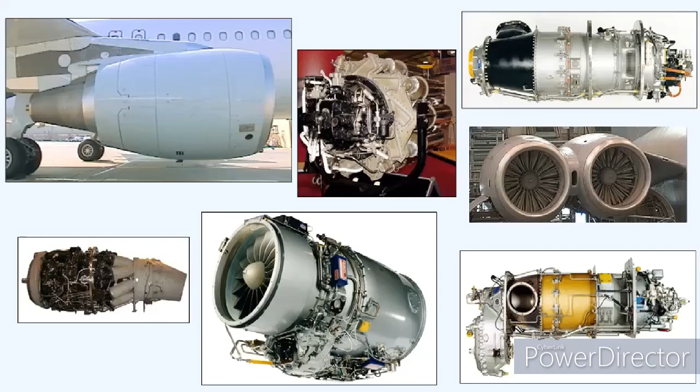All gas turbine engines use high-energy igniter units, or HEIUs, for engine starting. We'll investigate the intricacies of the high-energy igniter unit later.

All gas turbine engines have a dual ignition system fitted, meaning they have two high-energy igniter units. The high-energy igniter units each feed a separate igniter plug. High-energy ignition systems have an output of approximately 12 joules.

It may sometimes be necessary, to help prevent engine flameout, to have the ignition system selected in circumstances other than engine starting—for instance, during takeoff from contaminated runways, or flight through heavy precipitation. The use of the high-energy ignition system on these occasions will cause the igniter plug to erode so quickly that it will shorten its working life dramatically.

To minimize erosion of the igniter plugs, some aircraft engines are fitted with a combination ignition system, which includes a low-energy, 3 to 6 joules, continuous selection, as well as the high-energy, 6 to 12 joules, starting selection.

Continuous ignition, which energizes the low-energy mode of the igniters, is usually activated by selection of the appropriate switch on the engine start panel.

The starting ignition system is activated when the engine start sequence is initiated, either automatically or by the operation of the high-pressure fuel cock, start lever, or fuel and ignition switch.

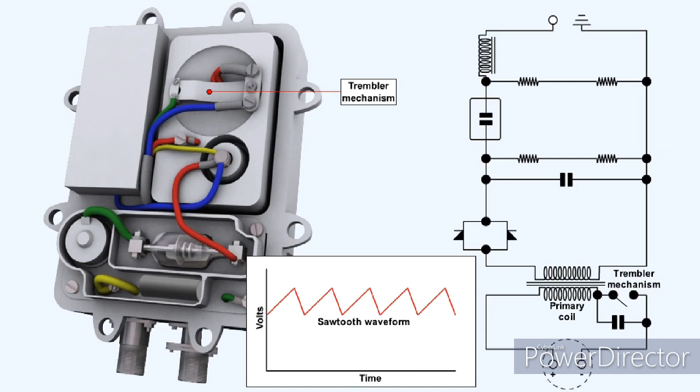Because we've generated alternating current, we can use a transformer to boost the voltage in the primary coil to 25,000 volts in its secondary coil.

The 25,000 volts alternating current is changed back to direct current in the rectifiers. The direct current commences charging the reservoir capacitor.

As the value of the charge in the reservoir capacitor builds up, it eventually reaches a level that causes a spark to jump the discharge gap.

The discharge gap exists within an evacuated tube. The fact that the tube is evacuated means that changing conditions of humidity and altitude will have no effect on the voltage required to jump the gap within the tube.

Consequently, the power of the spark at the igniter plug will be constant, regardless of ambient conditions.

The electrical energy which has crossed the discharge gap has then to flow through the choke. The choke acts as an inductance and slows down the current flow. Slowing the rate of current flow makes the duration of the spark longer.

The energy then passes to the igniter in the combustion chamber.

If the unit has to be removed from the engine for servicing, any charge which may remain in the capacitor, even after the electrical power to the unit has been disconnected, could be lethal to anyone touching the casing of the high-energy igniter unit.

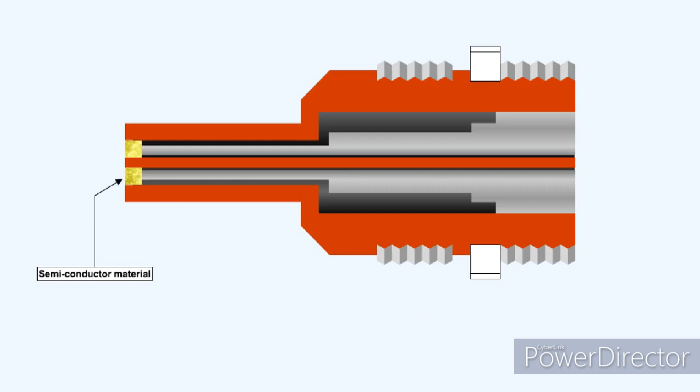A more modern version of the igniter plug is the surface discharge igniter plug shown here. The end of the insulator is formed from a semiconductor material, which allows an electrical leakage to occur between the hot electrode and the body of the igniter. This leakage ionizes the surface of the semiconductor material, providing a relatively low resistance path for the energy stored in the capacitor.

The discharge takes the form of a high-intensity flashover from the hot electrode to the body of the igniter, which only requires approximately 2,000 volts. This concludes the lesson on ignition systems.

There are three basic requirements which must be satisfied before we can start a gas turbine engine. The compressor turbine assembly must be rotated to get air into the combustion chambers, fuel must be provided in the combustion chambers, and ignition must also be provided in the combustion chambers to start the air-fuel mixture burning.

Supplementary to these basic prerequisites for engine starting are two other requirements which satisfy servicing essentials: the necessity to motor over the engine with no igniters operating, sometimes called a blowout or motoring over cycle. This usually only occurs after a failure to start, sometimes called a wet start. The other requirement is for the igniters to be operated independent of the start cycle.

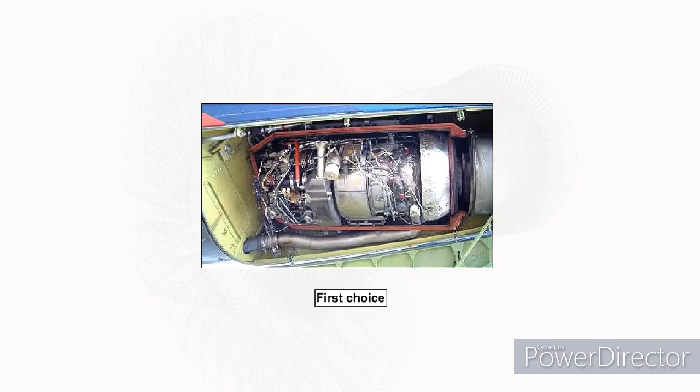The sources of air available for engine start, in order of preference, are: the Aircraft Auxiliary Power Unit, or APU. Use of an APU does not cost the airline anything, so it definitely will be the favourite method of supplying air for engine starting.

The Ground Start Unit. If a ground start unit is required, perhaps because of APU unserviceability, the airline will have to pay for its use. This is understandably not too popular with the airlines.

A crossbleed start, where air from an already started engine is used, doesn't cost the airline anything, but it does require that the engine supplying the air has power applied to it. In the crowded environment of the ramp, applying power to an engine carries obvious risks, and some airport authorities are reluctant to give permission to the pilot to carry out this type of operation.

Air from one of these sources is fed through an electrically controlled air start valve to the starter motor's air inlet, where it's used to turn the turbine rotor. The air is subsequently exhausted to atmosphere.

The turbine rotor turns the reduction gear, which rotates the engine high-pressure compressor shaft through a ratchet clutch arrangement, designed to prevent the starter motor being driven by the engine after engine start. The danger, should this happen, is that the starter motor will rotate at a speed sufficient to cause it to break up due to centrifugal force.

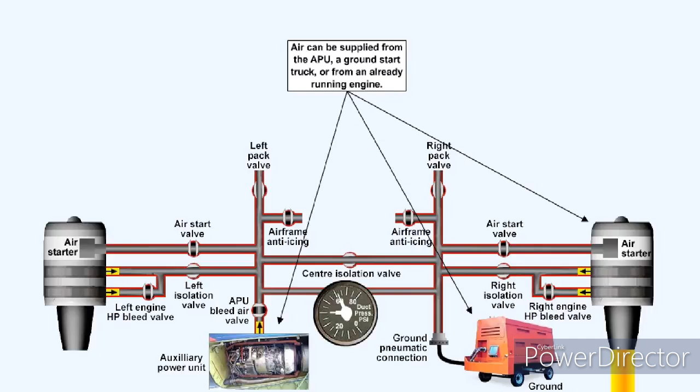On this particular start, we'll utilize the aircraft's APU to supply air. The aircraft's normal bleed air system ducting is utilized to pass the air to the starter motor. Non-return valves at the low-pressure and high-pressure engine bleed positions prevent air leaking back into the engine compressor during engine start.

The engine instruments which require the most attention during the engine start sequence are the exhaust gas temperature gauge, EGT, and the high-pressure compressor rotational speed gauge, N2. These two parameters must be monitored closely to ascertain whether or not the start cycle is proceeding safely.

Other instruments that should be monitored during the start are fuel flow, engine oil pressure, low-pressure compressor rotational speed, otherwise known as N1, system duct pressure, and the start valve open light. Normally the number 2 engine will be started first.

For the first start of the day, right ignition is selected, and the number 2 engine start switch is selected to ground, which is the ground start position. The selection of ground opens the APU bleed air valve and the number 2 engine air start valve.

To indicate that air is getting to the starter motor, the start valve open light above the engine instruments illuminates. The starter motor turns the high-pressure compressor, which we can note by checking the N2 reading. This is an appropriate time to start timing the starter motor duty cycle.

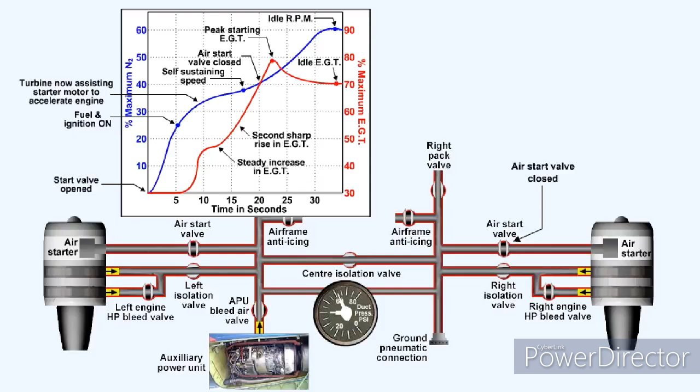Ground idle RPM is approximately 60% N2 and 25% N1.

To achieve a blowout cycle, the starter motor is activated without the selection of either fuel or the ignition system. When it's used for a blowout cycle, a typical air turbine starter motor has a duty cycle of 2 minutes on, followed by a 5-minute cooling down period. Always check the manual to determine the exact duty cycle of the starter motor fitted to your engine.

In the event of an engine flaming out while the aircraft is airborne, it may only be necessary to initiate the fuel flow and activate the ignition system without operating the starter motor to achieve a relight. The starter motor should not be required to rotate the engine in these circumstances because the engine should already be windmilling.

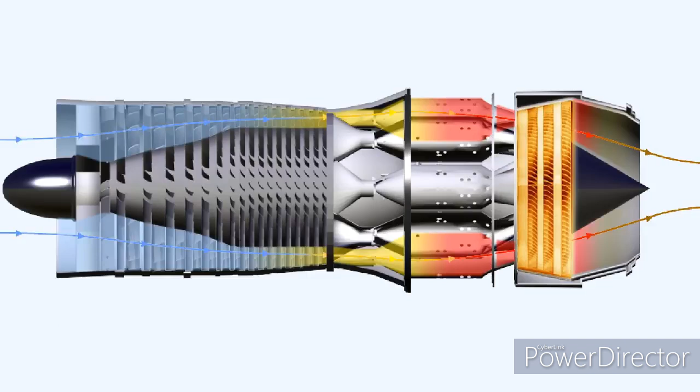The reasons for a hot start lie almost entirely in having either too much fuel or not enough air to cool the gases through the turbine. A surplus of fuel can be caused by a variety of reasons, such as the throttles either not being set to idle during the pre-flight check or being knocked away from the idle position after the pre-flight check. A shortage of sufficient cooling air can be caused by the engine not rotating fast enough, maybe because the duct pressure is too low to drive the starter motor at the required speed.

Slow engine rotation could also be caused because ice accretion within the compressor annulus has caused a partial seizure of the compressor.

A hot start can also be caused by the aircraft being positioned, perhaps for its second start of the day, with the wind going up the jet pipe, as opposed to the ideal situation when the wind would be going into the intake. The tailwind will make the job of the starter motor more difficult, and it will have more trouble pushing sufficient air through the engine quickly enough to keep the core temperature within limits. The residual heat that remains in the engine after shutdown will exacerbate the problem.

The failure of the gas turbine engine to start, more commonly known as the wet start, is indicated by its EGT not rising and its RPM stabilizing at the maximum that the starter motor can achieve. If the engine fails to light up within the required time limit, which is usually about 20 seconds, then the ignition supply should be deselected and the fuel supply shut off.

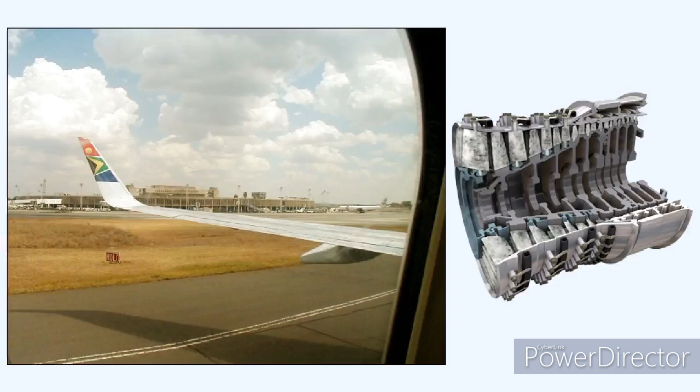For instance, if you're at a high-altitude airfield and you're attempting to start an engine which has a contaminated compressor, that compressor will choose this time to make its inefficiency felt.

Insufficient motive power applied to the starter motor will prevent it from rotating the compressor fast enough to push the required amount of air through the engine. This means the gases generated in the combustion chambers will not have sufficient power to assist the starter motor in accelerating the engine beyond self-sustaining speed. Thus, once the starter motor cycle has finished, the engine RPM remains stable below the figure that enables it to accelerate up to ground idle speed.

Engine rundown time, or spool down time, is the time taken for the engine to stop after the high-pressure fuel supply is shut off. When engines are shut down after flight, a mental note should be taken of the rundown time of each engine, and a comparison made between those times. Any engine with a rundown time appreciably less than the others should be noted. A short rundown time may be indicative of an impending malfunction.

The entire system which stores, carries and controls the fuel supply for the engines can be divided into two sections: the airframe fuel system and the engine fuel system.

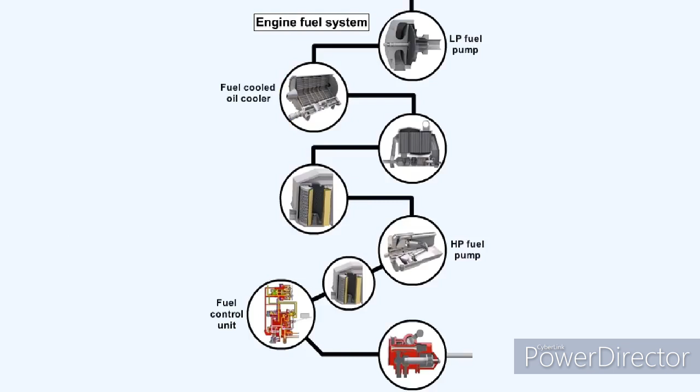A fuel-cooled oil cooler is fitted in the majority of gas turbine engine installations. The oil cooler serves the double purpose of cooling the oil and also heating the fuel. By raising the temperature of the fuel, the oil cooler eliminates the formation of ice crystals, which may block components downstream in the fuel system.

The oil feed line to the fuel-cooled oil cooler incorporates a pressure-maintaining valve. This valve keeps the oil pressure in the cooler higher than the fuel pressure. If the oil cooler does develop an internal leak, the fact that the oil pressure is higher than the fuel pressure will ensure that the oil leaks into the fuel system, rather than the fuel leaking into the oil system, which could be very dangerous.

The fuel heater assists in the warming of the fuel, and thus the elimination of ice crystals. The fuel heater, working in conjunction with the fuel-cooled oil cooler, uses compressed bleed air to warm the fuel to automatically maintain a predetermined fuel temperature. The automatic temperature control is achieved by the action of a Vernatherm thermal actuator. The thermal actuator incorporates a material sensitive to temperature change, used to open or close a valve which regulates the entry of hot air into the fuel heater from the engine compressor.

The low-pressure fuel filter is the first line of defense, protecting the delicate control components within the high-pressure fuel pump and the fuel control unit from the effects of dirt or contamination. The low-pressure filter is usually a replaceable paper filter element, capable of filtering out particles larger than 50 to 100 microns.

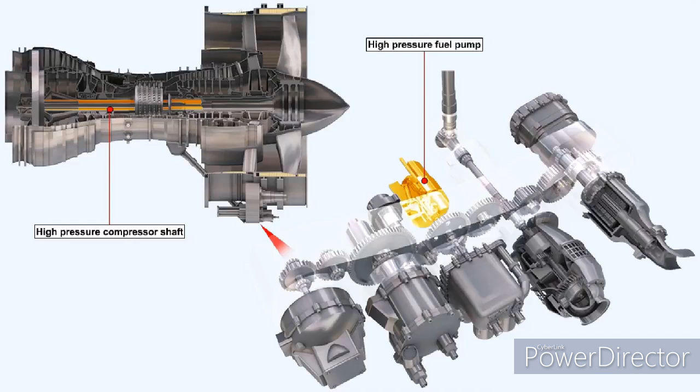The high-pressure fuel pump, illustrated, is representative of one type of pump employed. It's a plunger-type pump. It can be used as a single unit, if the volume of fuel required is not too great, but in larger engines 2 units can be driven together to supply a greater fuel flow.

Several plungers are fitted on a rotor assembly. The plungers are rotated against a stationary cam plate, which causes them to reciprocate within the bores that contain them on the rotor assembly.

The distance that the plungers move during this reciprocating action is dictated by the angle of inclination of the cam plate. Here we see the cam plate angled so that the plungers stay in the same position in their bores as the rotor drives them round.

Now the cam plate angle is such that the springs force the plungers to their maximum stroke when they are at the top of the cam plate, sucking fuel into the bores. And the cam plate forces the plungers to their minimum stroke when they are at the bottom of the cam plate, forcing fuel under pressure to the outlet of the pump.

The angle of inclination of the cam plate is controlled by a servo piston, which itself is controlled from the fuel control unit.

Most fuel systems incorporate a fuel filter into the output of the high-pressure fuel pump to prevent very fine particles entering the extremely small passageways inside the fuel control unit. The fuel filter is composed of a number of wire mesh screen discs.

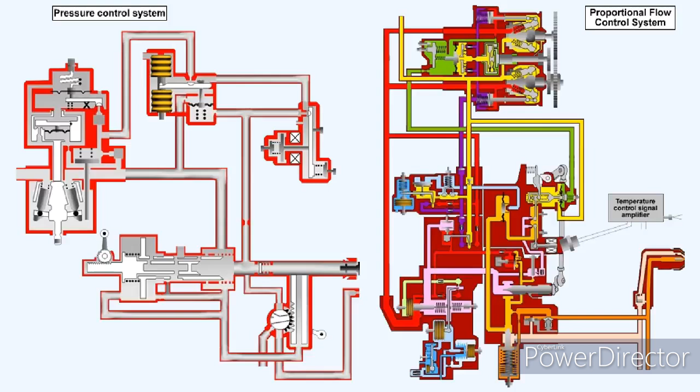Various devices within the fuel control unit are used to adjust the fuel flow to cater for variations in air intake pressure, engine acceleration control, exhaust gas temperature, RPM limiting, and compressor delivery pressure.

Variations in air intake, or P1 pressure, require that the fuel flow to the burners is adjusted so that a fixed RPM is maintained for a selected throttle position at all altitudes and airspeeds. This is achieved by the expansion or contraction of a capsule influenced by P1 pressure, which in turn modifies the fuel flow to suit the new conditions. This capsule, known as the barometric pressure capsule, is incorporated in an altitude sensing unit within the fuel control unit.

It's necessary to increase the fuel flow to the engine to make it accelerate. However, too rapid an increase of fuel flow into the engine can cause compressor stall and surge. To regulate the fuel flow under conditions of engine acceleration, an acceleration control unit is fitted within the fuel control unit. The acceleration control unit receives information regarding engine intake pressure, P1, and compressor delivery pressure, P3 for a two-spool engine, and uses this information to adjust a fuel metering plunger. The fuel metering plunger effectively acts as a second throttle valve in series with the main throttle, and it regulates the fuel flow to achieve the fastest engine acceleration without causing stall or surge.

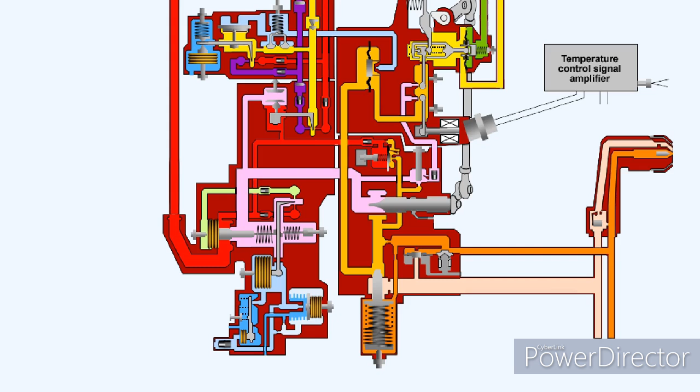If excessive centrifugal force is to be prevented from destroying the compressor spools, their maximum rotational speeds must be limited. There are basically two methods of achieving this compressor rotational speed limitation. The first method of controlling the rotational speed of a compressor, usually the low-pressure compressor, depends on an electrical signal proportional to the speed of the compressor shaft. A tachogenerator or electronic speed sensor, which is driven by the appropriate shaft, sends signals to an amplifier. If the output of the tachogenerator approaches a predetermined maximum level, the fuel flow will be adjusted to prevent the maximum RPM being exceeded. The second method of controlling the rotational speed of a compressor is normally used to control the speed of rotation of the high-pressure compressor shaft.

This high-pressure compressor shaft drives the accessory gearbox, which in turn drives, among other things, the high-pressure fuel pumps. Fitted within the high-pressure fuel pump is a hydromechanical governor. The hydromechanical governor uses hydraulic pressure as its controlling parameter. The hydraulic pressure, which is generated inside the pump by the rotation of the moving parts, is proportional to engine speed. As engine speed, and thus hydraulic pressure, builds, it acts on a diaphragm. Movement of the diaphragm opens valves which bleed off some of the servo piston pressure, which reduces the high-pressure fuel pump cam plate angle. This reduces the high-pressure fuel pump output and attenuates the fuel flow to the burners.

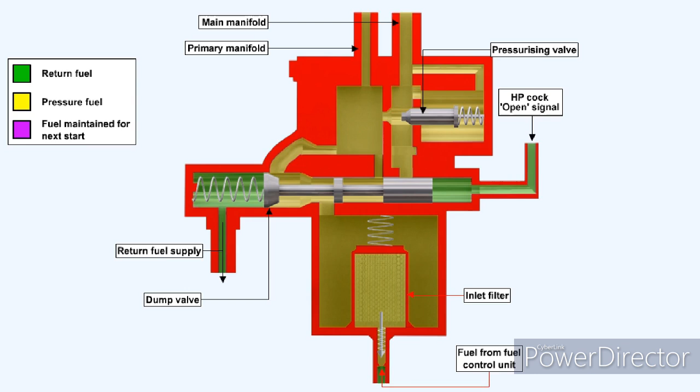Many modern gas turbine engine installations utilize electronic engine control to enable better fuel economy, better reliability, and prolonged engine life. Two types of electronic engine control are currently in use: the supervisory engine control system, and the full authority digital engine control system.

The supervisory engine control system uses a computer which receives inputs of various engine operating parameters and controls a standard hydromechanical fuel control unit. The fuel control unit responds to the electronic engine control commands and performs the functions necessary for engine operation and protection.

The computer will monitor EPR, throttle lever angle, Mach number, engine intake pressure, and temperature, and will maintain a constant thrust regardless of changes in air pressure, temperature, or flight environment. Any fault with the electronic engine control will cause the system to revert to manual control.

The Full Authority Digital Engine Control System, commonly called by its initial letters FADEC, receives all the necessary data for engine operation and takes over virtually all of the steady-state and transient control functions, which includes compressor airflow control.

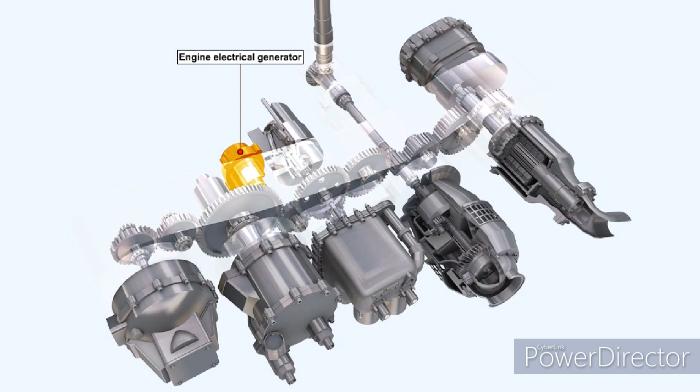The FADEC system can be powered from the aircraft electrical system, but in most modern aircraft the system is driven by a separate generator fitted to the accessory gearbox of the related engine. This concludes the lesson on engine fuel systems.

The adoption of the gas turbine engine as the power unit of choice for military and subsequently civil aircraft became more and more the norm after the end of World War II.

During World War II, the war effort required every drop of gasoline, and partly because it was thought that gas turbine engines were relatively insensitive to the properties of the fuel they used, but mainly because it was more available than gasoline, kerosene was chosen to power them.

After the war, the United States Air Force started using a fuel in gas turbine engines which spanned the gasoline and kerosene boiling ranges. This fuel was called a wide-cut fuel, a name which stemmed from the position in the distillation process from where the fuel could be taken.

It was assumed that during wartime conditions, wide-cut fuel would be available in greater volume than either gasoline or kerosene alone.

However, when compared to a kerosene-type fuel, the higher volatility of the wide-cut fuel gives it some operational disadvantages. At high altitudes, wide-cut fuel evaporates much more quickly. There is also a greater risk of fire and explosion when wide-cut fuel is being handled on the ground.

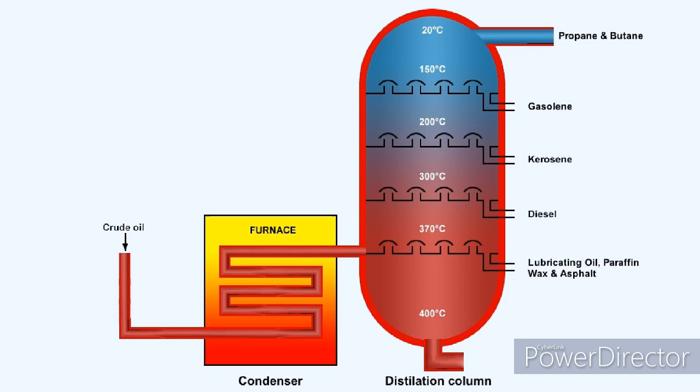Finally, the residual, which can be further refined by a catalytic cracking process into lubricating oil, paraffin wax and asphalt, is drawn off at the bottom of the column.

The quality of the light products generated by distillation alone is often poor, so the refinery must use conversion processes, like the catalytic cracking just mentioned, and upgrading to bring the fuel to a standard which is suitable for its task.

Upgrading processes are used to improve the standard of the fuel by using chemical reactions to remove any compounds which may give it undesirable qualities.

One such upgrading process is called sweetening. Sweetening converts sulfur mercaptans in the fuel into disulfides. While sulfur mercaptans are corrosive and have a strong offensive odour, the disulfides are not corrosive, and their smell is less strong.

The two leading organisations which set and maintain specifications for civil aviation turbine fuels are, in the United Kingdom, the Ministry of Defence, or the MOD, and in the United States, the American Society for Testing and Materials, ASTM. In the Commonwealth of Independent States and parts of Eastern Europe, gas turbine engine fuels are covered by GOST specification.

The specification of an ideal fuel for a gas turbine engine would include the following requirements. The fuel must be able to flow freely from the aircraft's fuel tanks to the engines.

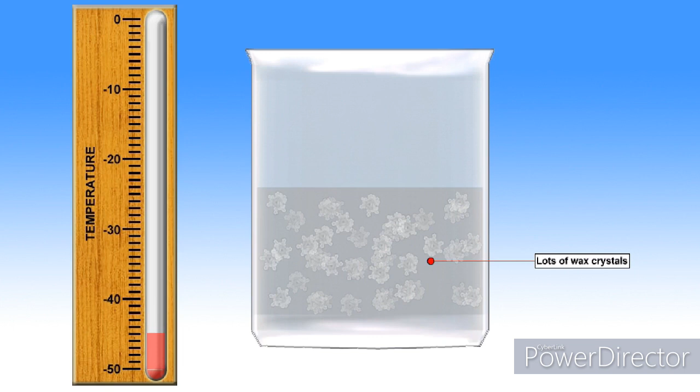Thus the fuel changes gradually from a homogeneous liquid into a liquid which contains a few wax crystals, then to a slushy liquid composed of fuel and wax crystals, and finally to an almost solid block of wax crystals.

Small carbonaceous particles are formed early in the combustion process within a gas turbine engine. In ideal conditions within the engine, the particles would be completely consumed, but conditions seldom remain ideal, and if they impinge upon the nozzle guide vanes and rotor blades of the turbine, the particles will erode them.

Fuels differ in density and therefore in energy content per unit weight or unit volume. Less dense fuels have a higher energy content per unit weight, as for instance aviation gasoline, which has 18,800 British thermal units per pound. But they have a lower energy content per unit volume, in this case 112,500 British thermal units per gallon. The relationships are reversed for denser fuels like kerosene, which has only 18,610 British thermal units per pound, but 125,800 British thermal units per gallon.

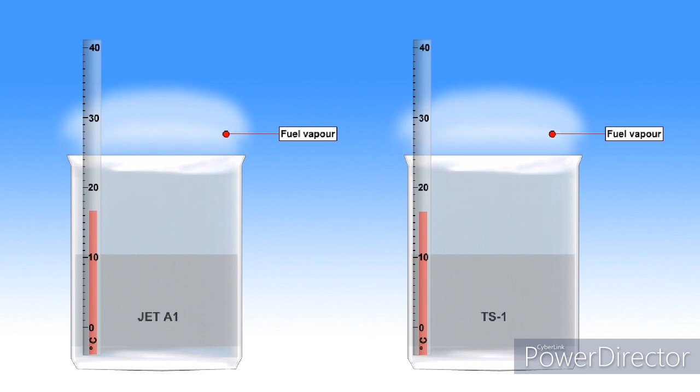The flash point of a liquid is the lowest temperature at which the vapours above a liquid will ignite when they are exposed to an ignition source. The higher the flash point of a fuel, the lower the fire hazard it presents.

We have just seen that to burn, the fuel must turn from a liquid state into a vapour. Volatility is a fuel's ability to vaporize, so it's important that the fuel is reasonably volatile. However, if the fuel is too volatile, it will evaporate quickly when the aircraft is at altitude, and it could cause vapour locks to occur at the inlet to the fuel pumps.

Lubricity is the ability to reduce friction between solid surfaces which are in relative motion. Gas turbine engine fuels must have a degree of lubricity, because the fuel is used as a lubricant in the pumps. These requirements can be met, and the various methods used to achieve them are discussed later. However, in practice, the cost of satisfying all of them is prohibitive, and therefore compromises have to be made.

We've already stated that the gas turbine engines of commercial aircraft would normally use kerosene fuels. The types of fuel which can be used in gas turbine engines are listed here, together with some of their characteristic properties.

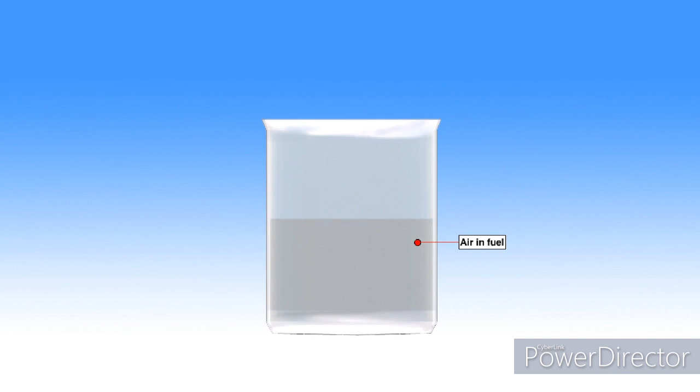If a fuel sample is placed in a clean, transparent, dry glass container and swirled vigorously to generate a vortex in the sample, and the sample appears cloudy or hazy, this could be caused by a number of factors. If the cloudiness appears to rise quite rapidly towards the top of the sample, then air is present. If the cloud falls quite slowly towards the bottom of the sample, then water is present in the fuel. Having said that, a cloudy appearance usually indicates the presence of water.

A certain amount of water is present in all fuel. The water, which is normally dissolved within the fuel, gives rise to the following fuel system problems. As an aircraft climbs to altitude, the fuel is cooled, and the amount of dissolved water that it can hold is reduced. Water droplets form, and as the temperature is further reduced, the droplets turn to ice crystals, which can block fuel system components.

Microbiological fungi called Cladosporium resinae and Pseudomonas aeruginosa are present in all turbine fuels. These fungi grow rapidly in the presence of water to form long green filaments, which join together to form dark, gel-like mats. The filaments and mats can block fuel system components. The waste products of the fungus are corrosive, especially to fuel tank sealing substances.

The inclusion of a fuel system icing inhibitor, or FSII, in the fuel will help to overcome these problems. The inhibitor presently in use in all countries except Russia is diethylene glycol monomethyl ether. Not only does it inhibit the ability of the water in the fuel to freeze, it also acts as a biocide, which retards the growth of microorganisms in the fuel.

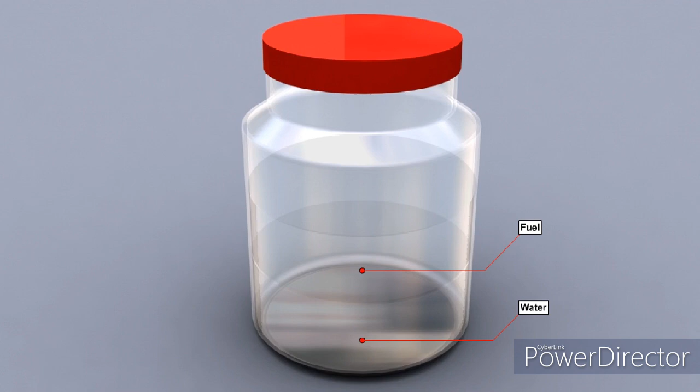If the fuel can be allowed to settle after replenishment, then the water droplets, being heavier than the fuel, will fall to the bottom of the tank and can then be drained off through the water drain valve, which is situated in the lowest part of the fuel tank.

Heating the fuel before it's passed into the more sensitive components of the system will assist in preventing ice formation. In gas turbine engine fuel systems, the fuel is passed through a heat exchanger which is powered by compressor delivery air to melt any ice crystals which may have formed while the fuel was exposed to the very low temperatures experienced at high altitudes.

Some systems also utilize a fuel-cooled oil cooler. This has an added attraction in that we appear, just for once, to get something for nothing. After all, the oil has to be cooled, and the fuel benefits by being warmed, so 2 jobs for the price of 1.

Once the fuel is in the aircraft fuel tanks, the main source of water contamination is the atmosphere that remains within the tank. If the tanks are topped up to full, then the atmosphere is excluded, together with the moisture it contains, thus minimizing the likelihood that the fuel will be contaminated.

Caution is required here. Filling up the tanks may prove an embarrassment the next day if the ambient temperature rises. The volume of the fuel in the tank will increase, and there is the danger that it may spill out of the vent system.

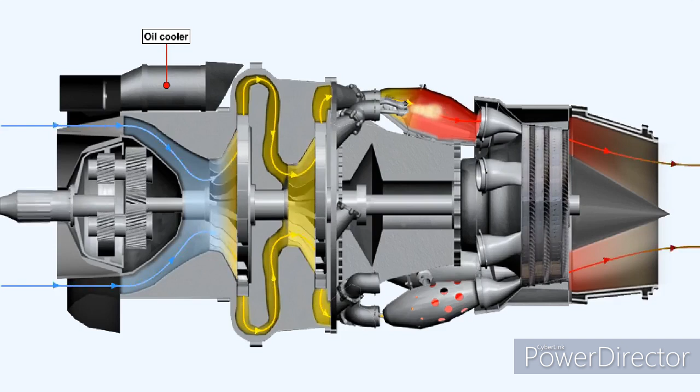A further task of the lubricating oil is that of being a hydraulic fluid. For instance, in some turboprop engines, the control of the pitch of the propeller blades is achieved by using the engine lubricating oil to operate the pitch change mechanism.

Most gas turbine engines use a self-contained recirculatory lubrication system in which the oil is distributed around the engine and returned to the oil tank by pumps. There are two basic recirculatory systems which we'll investigate here: the pressure relief valve system and the full flow system.

The pressure relief valve, which gives its name to this type of lubricating system, is situated in parallel with the oil pressure pump. It limits the pump outlet pressure by diverting any excess volume back to the inlet of the pump, thus controlling the flow of oil to the bearing chambers.

The engine oil pressure is restricted to a value which the engine designer considers correct for all conditions that the engine might encounter.

The pressure relief valve will begin to relieve pressure at the value which is generated by the oil pressure pump at engine idling speed. As a consequence, the pressure relief valve theoretically maintains a constant pressure over the whole of the engine's speed and oil temperature ranges.

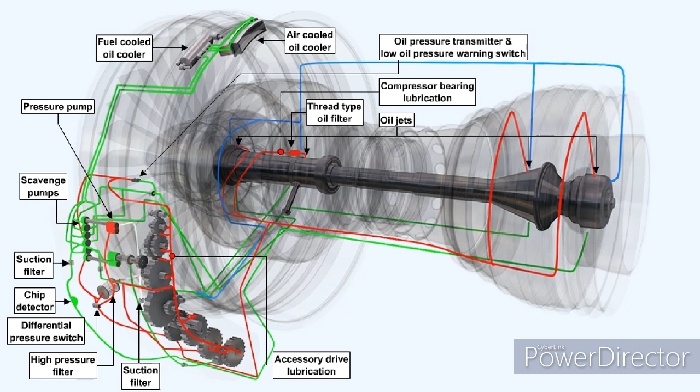The scavenge pumps pass the oil to the oil cooling system. This engine utilizes two types of oil cooler, a fuel-cooled oil cooler and an air-cooled oil cooler. Normally the fuel-cooled oil cooler is sufficient to cool the oil on its own, but in the event that it proves inadequate, a valve opens automatically and brings the air-cooled oil cooler into operation as well.

We mentioned earlier that air pressure escaping from seals cannot be allowed to build up within the engine. In this engine, air pressure within the engine is vented through the hollow shaft of the drive between the intermediate gearbox and the external gearbox, leaving the external gearbox via the centrifugal breather.

The oil tank is normally a separate unit mounted on the side of the engine, although it can be part of the engine intake, or even an integral part of the accessory drive unit.

Whatever form the oil tank takes, it must incorporate provision for filling, either by gravity and/or more normally from a pressure source. There must also be some method of determining the contents of the tank, either by a sight glass or by a dipstick—sometimes both methods are used. A de-aerator tray removes air bubbles from the oil as it flows back into the tank.

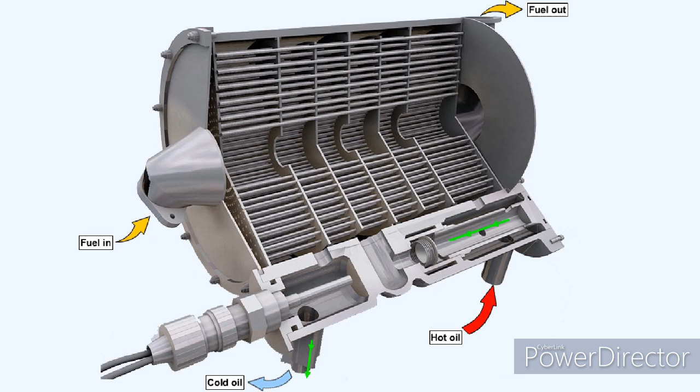In the event that damage to the oil cooler matrix does occur, fuel is prevented from entering the oil system by the oil pressure being kept at a value higher than the fuel pressure. This is done by a pressure-maintaining valve located in the oil feed line to the cooler. Thus the oil will leak into the fuel system rather than the other way round.

Chip detectors, which are permanent magnet plugs, are situated in some of the scavenge lines to collect ferrous material from the oil as it returns to the scavenge pumps. The chip detector is retained in the pipeline by a bayonet fitting within a self-sealing housing. The fact that the valve housing is self-sealing means the detector can be removed without any loss of oil.

We've already stated that to prevent excessive air pressure within the accessory drive unit and the bearing chambers, the interior of the engine must be vented to atmosphere. Airborne oil droplets in the air within the engine form an oil mist which, if allowed to escape unhindered, would rapidly deplete the engine oil contents. The oil mist is vented to the accessory drive unit, where it must pass through the centrifugal breather before reaching the atmosphere.

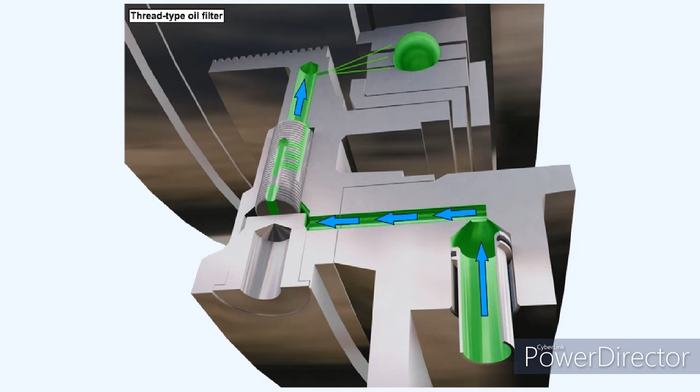Each return oil line contains a scavenge filter just downstream of the magnetic chip detector. These scavenge filters will collect any debris returning from the bearing chambers. Both pressure and scavenge filters are constructed in a tubular form from either a very finely woven wire cloth or resin impregnated with fibres.

Some filters may have a differential pressure switch fitted across them, or alternatively they may be fitted with a pop-up indicator, a small button which can be seen protruding from the filter casing to give a visual warning of a partially blocked filter.

Gas turbine engine oils must have a high enough viscosity for good load carrying capacity, but they must also have a sufficiently low viscosity to ensure a good flow of oil at low temperatures, as would be the case, for instance, when starting after a prolonged cold soak.

Early gas turbine engines used the same oils as had been used in petrol engines for years. These oils were mineral-based. It was found that under the higher temperatures and speeds at which gas turbine engines operated, mineral oils burnt, scummed, and oxidized.

To attain the properties mentioned at the beginning of this lesson, synthetic oils were developed. Synthetic oils have the following qualities: low volatility to prevent evaporation at high altitudes, and a high flash point which will prevent the lubricant igniting at high temperature points within the engine, such as at the turbine bearings.

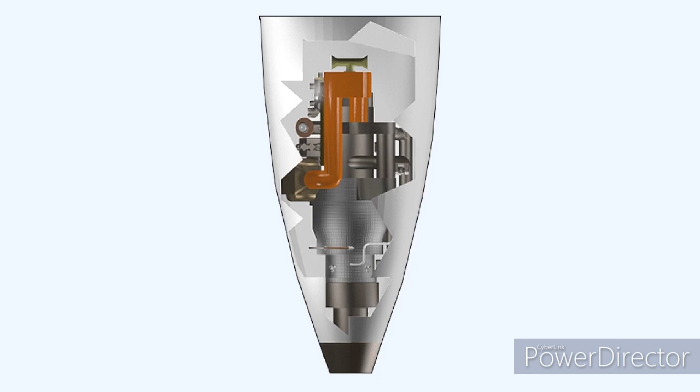Aircraft manufacturers and operators also recognized that because it had an auxiliary power unit, the aircraft was no longer dependent on expensive ground support equipment. The auxiliary power unit can provide the necessary power for operation of an aircraft's electrical, hydraulic, and pneumatic systems.

While earlier aircraft used the piston engine to drive their auxiliary power units, it soon became obvious that the gas turbine engine was safer, lighter, quieter, and more reliable. The gas turbine engine auxiliary power unit uses AVTUR, the same fuel as the main engines use, so the problem of fuel storage and fuel management systems is minimized.

The type of gas turbine engine normally used to drive auxiliary power units is a turboshaft engine with a free turbine. The free turbine, which is designed to run at a constant speed, drives the accessories via a gearbox. This ensures that the auxiliary power unit's generator maintains a constant frequency without the need for an additional constant speed drive unit.

Some aircraft use air bled from the auxiliary power unit's compressor to power the aircraft's pneumatic system, but it's also common for the free turbine to drive a separate load compressor to supply bleed air. The auxiliary power unit is normally positioned in the tail of the aircraft, where its operation will not harm personnel working in proximity to the aircraft.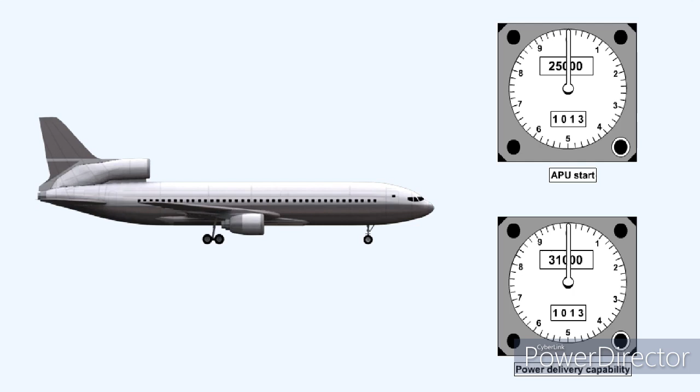For example, the L-1011 TriStar can start its auxiliary power unit up to 25,000 feet and has the capability of delivering power up to 31,000 feet, while the Allied Signal auxiliary power unit, fitted in some Boeing 737 aircraft, has a 41,000-foot start capability and can deliver 66 kVA at this altitude. If the aircraft descends to 31,000 feet, that same auxiliary power unit can deliver 90 kVA.

Other 737 aircraft may have Garrett or Sundstrand auxiliary power units fitted. These units have a maximum recommended start altitude of 25,000 feet and are only rated at 55 kVA.

On older aircraft, such as the earlier Boeing 737 series, the auxiliary power unit panels incorporate load meters and EGT gauges, as well as indicator lights which warn of low oil quantity, low oil pressure, high oil temperature, and overspeed.

The auxiliary power unit's turboshaft engine is started by an electric starter motor powered from the aircraft battery, although some later model aircraft have a dedicated auxiliary power unit battery to preserve the aircraft batteries.

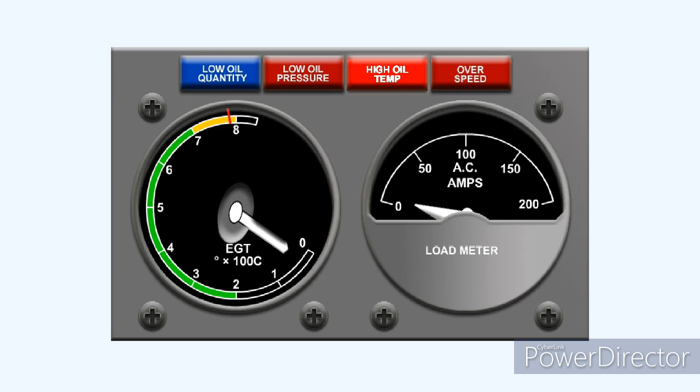The auxiliary power unit has only one fire bottle, which uses Freon, stored at a pressure of approximately 800 psi, as the extinguishant.

Operation of the auxiliary power unit fire handle passes an electrical supply through a cartridge, which ruptures a diaphragm in the outlet of the bottle.

When the diaphragm breaks, the internal pressure forces the extinguishant into the auxiliary power unit shroud, where it suffocates the fire.

The indication that the cartridge has fired is given by the displacement of a yellow disc, which is positioned on the side of the aircraft, where it can be checked during the walk-round inspection.

The red disc alongside the yellow disc will become displaced if the fire bottle has become too hot or its internal pressure has become too high.

Just as it would be impossible to fly a large modern aircraft safely without the flight instruments, it would also be impossible to fly it safely without the engine and aircraft systems instruments.

The engine instruments are divided basically into two categories that are called either the performance indicators or the engine condition indicators.

Performance indicators are thrust indicating instruments, such as the engine pressure ratio (EPR) gauge, or the fan speed (N1) gauge. Engine condition indicators include the exhaust gas temperature (EGT) gauge, compressor speed, oil pressure and oil temperature gauges. We'll be discussing these and others later in the lesson.

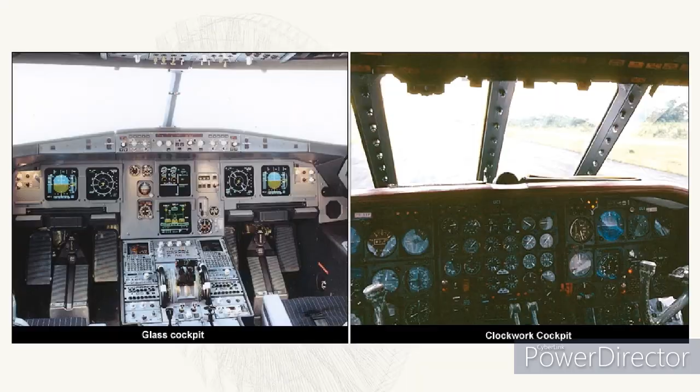There are two types of cockpit display: the analog display, a clockwork cockpit, or the electronic display, a glass cockpit. We'll be showing some of the instruments required in the clockwork cockpit as we go through the lesson. The glass cockpit displays will be described in detail in the latter part of the lesson. In the clockwork cockpit, there is a multitude of gauges displaying information.

The glass cockpit is displayed on cathode ray tubes, CRTs, or liquid crystal display panels, LCDs, with light-emitting diodes, LEDs, for digital displays. Alongside the glass cockpit display, a small number of conventional gauges are retained in case of failure of the electronic displays.

Both types of display convey essentially the same information to the pilot, but the flexibility of the glass cockpit system means that it's now taking over as the preferred means of showing both flight and engine instrumentation.

Thrust measuring instruments are of two basic types. The type that measures the jet pipe pressure, the P7 gauge. The type that measures the ratio of two parameters, the jet pipe pressure and the engine air intake pressure, the EPR gauge.

Turbopropeller aircraft measure and indicate engine torque, which is used to give an indication of engine power.

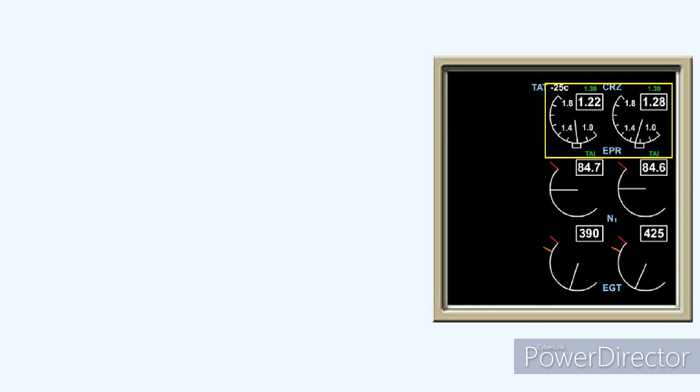High-ratio bypass engines use the engine pressure ratio, EPR, as an indication of engine power output. The ratio is that between the exhaust pressure and the engine intake pressure.

On some large turbofan engines, the values of the turbine discharge pressure and the fan outlet pressure are integrated. The figure thus obtained is then compared to the compressor inlet pressure to produce what is called integrated EPR.

Pitot tubes, suitably positioned, sense the pressures which are required to work the system. The tubes can either be connected directly to the indicator in the cockpit or to a pressure transmitter which is electrically connected to the indicator.

Turboprops and turboshaft engines develop their power by producing a preponderance of torque to turn the propeller, rather than pure thrust from their jet efflux. Torque, by definition, is a force applied at a distance to a turning point.

The torque meter system measures, and its indicator displays, the power being produced by the engine. There are two main methods employed in measuring the torque of the engine: one uses oil pressure, and the second is an electronic device.

The units of measurement vary between systems. The indicator gauges may be calibrated to read pounds per square inch or foot-pounds, Newton meters, brake or shaft horsepower.

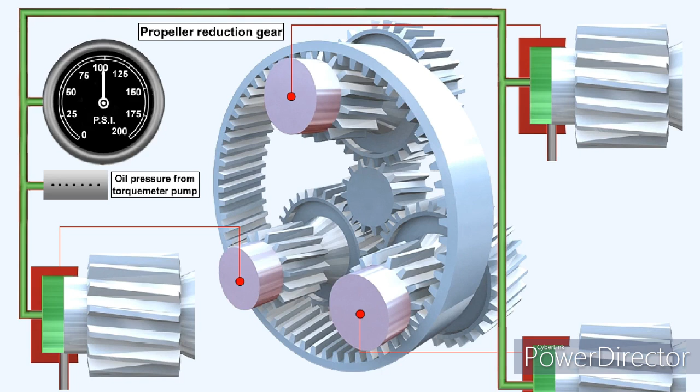In addition to giving an indication of engine power output, the torque meter system can also be utilized to send signals to the auto feather and the water methanol injection systems.

The auto feather system, as its name implies, will automatically feather the propeller of a failed engine. This is particularly important if the failure occurs on takeoff.

The electronic system comprises two concentric shafts. The first shaft, which is called the torque shaft, connects the engine to the propeller reduction gearbox. The second shaft, the reference shaft, is connected only to the engine.

An exciter wheel is fitted to the forward end of each shaft. The exciter wheels rotate past an electromagnetic pickup and produce an AC voltage.

While the engine is stationary, the exciter wheels are aligned, but as power is increased, the torque shaft twists. This changes the phase relationship of the voltages produced.

The change in phase relationship, which is used to drive an indicator through an amplifier, is proportional to the change in power.

The RPM indicator is called a tachometer, tacho for short. There are three methods of measuring engine rotational speeds: the mechanical magnetic tachometer,

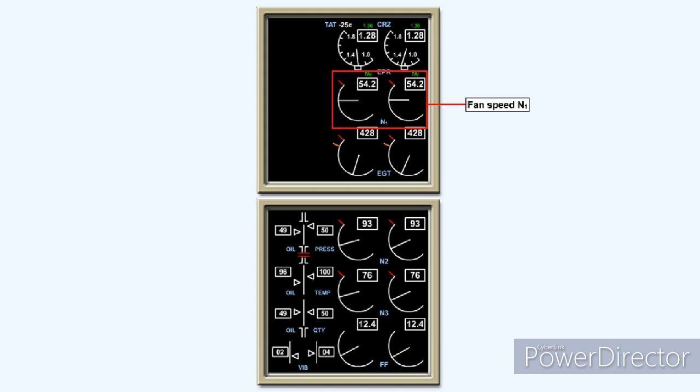The speed of rotation of each of the spools is displayed. N is the SI symbol for rotational speed. Thus, in a triple spool engine, the speed of the low-pressure compressor, the fan, would be displayed as N1. The intermediate spool speed would be shown as N2,

and the high-pressure compressor rotational speed would be N3. It's probable that there would always be provision on the high-pressure compressor spool for driving a tacho generator through the external gearbox, which is driven by the high-pressure compressor shaft. But it may not always be possible to have gearboxes driven by the other compressor shafts. In this case, a speed probe could be used.

There are two ways that the speed probe can generate the pulses required to feed the system. The first method uses the fan blades to excite the magnetic field of the sensor head of the speed probe as they pass it. The excitations generate a waveform which has a frequency proportional to the rotational speed of the fan.

The second system uses a phonic wheel, which is part of the compressor shaft. The teeth of the phonic wheel pass through the magnetic field of the sensor, and thus generate pulses at a frequency which is proportional to the rotational speed of the shaft. The output of the sensor is amplified before being sent to the gauge.

The advantage of the speed probe system is twofold. First, the reduction in the number of moving parts required in the engine, and second, that a number of separate electrical outputs additional to those required for speed indications can be provided, for example, automatic power control and flight data acquisition systems.

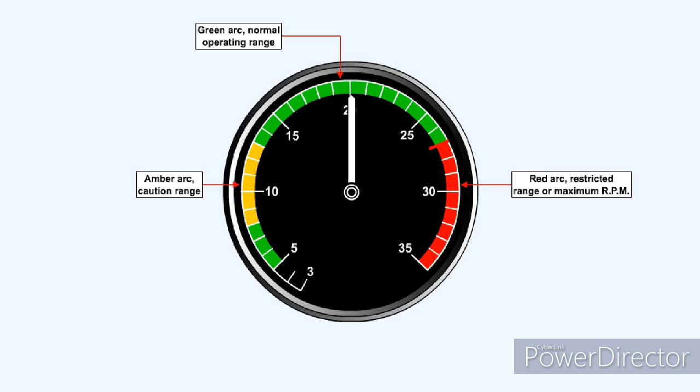In line with other instruments, coloured arcs or indicator lines are used to show ranges and limits of engine speed. A green arc will represent the normal operating range, and an amber arc will denote a caution range. Red arcs show either the maximum speed of the engine or RPM ranges which are restricted, perhaps because vibration may be encountered within them.

The glass cockpit uses a mixture of analog and digital displays on the same dial. This type of analog display is very useful in two ways: firstly, for instantaneous comparison of multi-engine states, and secondly, the digital readout is a very accurate indication of individual engine states when they're required.

If a parameter limitation is exceeded in the glass cockpit type of display, the whole of the dial displaying that particular parameter will change to either amber or red, depending on how far the limitation has been exceeded. On some older glass cockpit instrumentation, vertical ribbon displays are used.

Many multi-engine aircraft are provided with a visual indicator, called a synchroscope, which indicates the RPM difference between the slave engines and the master. As you can see from this picture, the presentation consists of miniature propellers which rotate to show when an RPM difference exists, and whether the slave is faster or slower than the master.

Gas turbine engines are heat engines. The power gas turbine engines produce is directly proportional to the heat released during the combustion of the fuel. Engine components and systems are designed to withstand certain temperatures. If their temperature limits are exceeded, they will fail. To allow safe operation, the engine temperatures must be monitored.

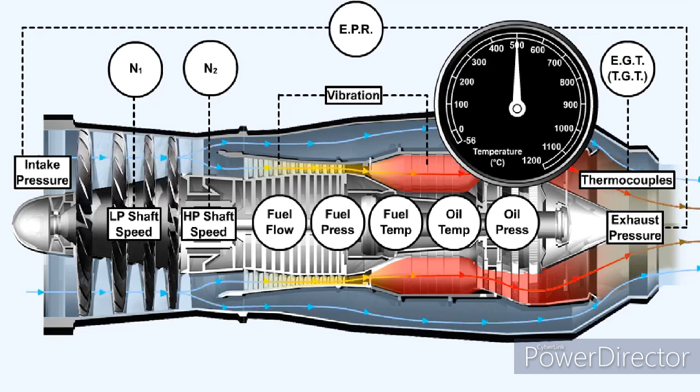There are 4 major types of temperature measuring device. They are: the expansion type, which relies on the principle that most solids, liquids, and gases expand and contract with temperature changes. Two examples of the expansion type of device are the mercury thermometer and the bimetallic strip.

The vapor pressure type of device uses the principle that liquids, when subjected to a rise in temperature, change their state from liquid to vapor. By measuring the pressure of the vapor, an indication of temperature can be gained.

A change in the temperature of some electrical conductors, for instance platinum, will cause a change in the electrical resistance of that conductor. Measuring the change in the resistance of this conductor will indicate its temperature. This type of sensor is called the resistance type or the temperature bulb.

In 1821, Thomas Seebeck accidentally discovered that heating the junction of two dissimilar metals will produce an electrical potential that is a function of temperature. If the junction is contained within a closed loop, the value of the potential will be dependent on the difference in temperature between the junction where the heat is applied, the hot junction, and the other end of the loop, the cold junction.

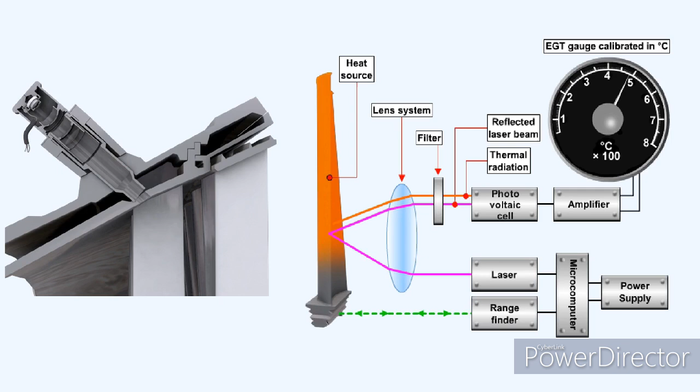The temperature of the gas passing through the turbine of a gas turbine engine is the most critical parameter of those displayed on the engine instruments. Operation of the engine beyond the limits of turbine temperature, even for only a moment, is liable to cause excessive turbine blade creep, which will be catastrophic if the rotating blades touch the casing of the engine.

The gas temperature must be monitored closely, and automatic temperature limiting equipment is fitted to most gas turbine engines operating today. To enable this monitoring to be achieved, temperature probes are inserted in the gas stream.

Temperature probes are formed from the junction of two dissimilar metals, which, as we've just seen, generate a potential when the junction is heated. The potential is proportional to the temperature applied to the junction.

This diagram shows how the terminals for the connections to the probes, which are the hot junctions, are connected, and also how the gas flows over them. The output from the probes is sent to the cockpit engine instrument, which is the cold junction. Here the potential is displayed on a very sensitive millivoltmeter calibrated to show the engine gas temperature.

A single probe would not supply enough information to accurately tell the pilot what was going on in the whole of the turbine. It could only inform him about a small part of the turbine that it was monitoring. Additionally, a failure of that single probe would rob the pilot of his knowledge of the most important of the engine parameters.

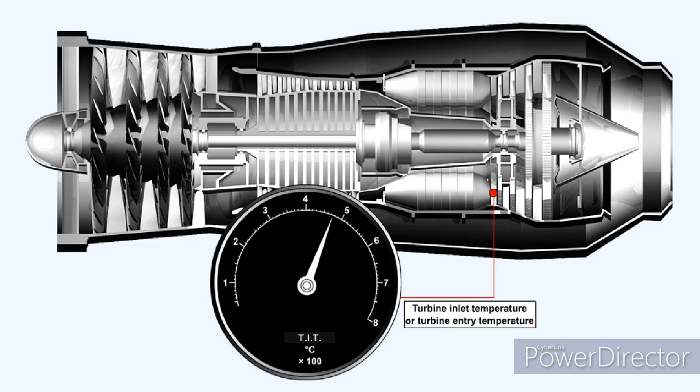Obviously, it would be ideal if the temperature could be sampled either before the turbine, when it would be called either turbine inlet temperature, TIT, or turbine entry temperature, TET. Alternatively, the gas temperature could be sampled inside the turbine, when it would be called turbine gas temperature, or TGT. In every case, the position of the probes is dependent upon their ability to withstand the temperatures they encounter.

Actual blade temperature can be measured by the radiation method, using an optical pyrometer.

Air temperature is one of the basic parameters used to establish data vital to the performance monitoring of aircraft engines, for example thrust settings, fuel-air ratio settings, etc. The ideal temperature to suit these requirements is that sensed under static conditions at various flight levels. This temperature is called variously the outside air temperature or static air temperature, SAT. Unfortunately, this measurement can be affected by the adiabatic compression that occurs with increase of aircraft speed.

Below 0.2 Mach, the temperature of the air sampled is very close to SAT. But at higher Mach numbers, an increase in skin friction will raise the air temperature. This increase is commonly referred to as ram rise, and the temperature indicated is called ram air temperature, RAT, which is the static air temperature plus the increase caused by the ram rise.

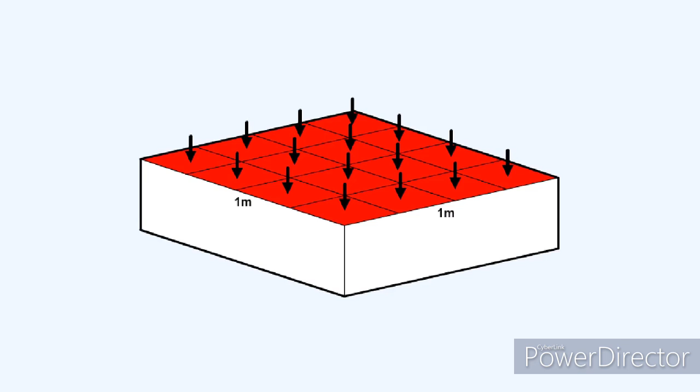Pressure is defined as force per unit area. Pressure is normally indicated either as pounds per square inch or inches of mercury.

When discussing pressure measurement, we must use the following terms: absolute pressure and gauge pressure. Absolute pressure is measured relative to absolute zero pressure, the pressure that would occur at absolute vacuum. Thus the absolute pressure on the Earth's surface at sea level is the atmospheric pressure, which is 14.7 pounds per square inch.

The more usual pressure measured by most gauges is called gauge pressure. Gauge pressure reflects an adjusted pressure that reads zero at the Earth's surface.

Elastic pressure sensing elements are used to measure pressure. Forces are produced within the elements by applied pressures, and these forces are converted to mechanical movement.

The mechanical movement is then used to operate either a direct reading gauge or an electrical transmitter. The sensing elements commonly used are diaphragms, capsules, bellows, and Bourdon tubes.

A diaphragm is a sheet of semi-flexible material, anchored at its periphery, and most often round in shape. It usually serves as a barrier between two chambers, moving slightly into one chamber or the other depending on differences in pressure. Diaphragms are used to measure low pressures.

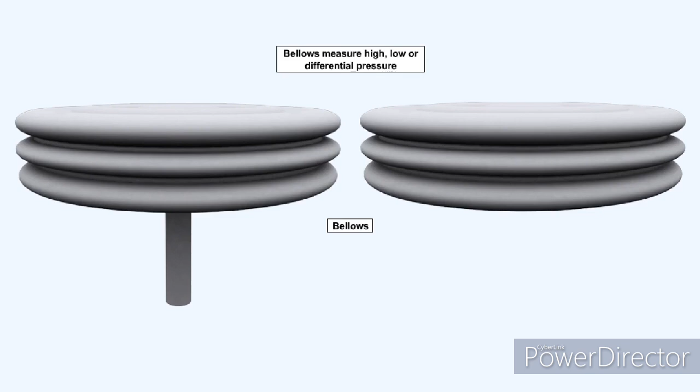The bellows element can be considered as an extension of the corrugated diaphragm principle. It may be used for high, low, or differential pressure measurement. Typically, the bellows element is used to measure pressures like the output of an aircraft low-pressure fuel booster pump.

The Bourdon tube is the oldest of the devices used for sensing pressure. The element is essentially a length of metal tube with an elliptical cross-section, shaped into a letter C. One end of the tube is sealed and called the free end. The other end is connected to the pressure source and fixed. When pressure is applied, the tube tries to straighten. This movement is magnified to drive an indicator pointer.

The Bourdon tube can be manufactured to indicate high or low pressures, but it's normally associated with higher pressures such as engine oil pressure.

As well as the actual pressures, warnings can be displayed to the pilot by pressure-operated switches. These switches can operate for low, high, or incorrect differential pressure. A differential switch or gauge is subjected to pressure on both sides of its sensor.

In many of the systems associated with the operation of the aircraft and its engines, liquids and gases are used, the pressures of which must be measured and indicated. The gauges and indicating systems fall into two categories: direct reading and remote indicating.

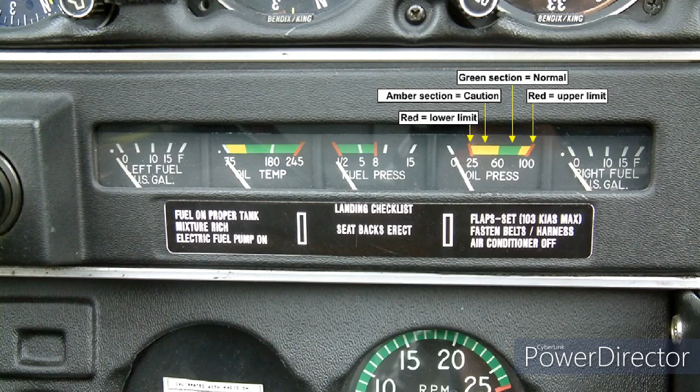Vibration monitoring equipment is fitted to almost all commercial jet engine aircraft. Although gas turbine engines have an extremely low vibration level, any change in that level is usually indicative of damage which may lead to failure.

Warnings will be given in the cockpit if the vibration levels are exceeded, and some systems have a continuous readout of vibration levels. Modern engines have the facility whereby the vibration level of each rotating assembly can be monitored, so that the source of any vibration can be pinpointed.

The principle upon which vibration monitoring equipment works requires an input from a detector, which can be either a piezoelectric crystal mounted strategically on the engine, or a fixed coil carrying 115 volts at 400 Hz, the output of which will be affected by the movement of a magnet within it, which is mounted on springs.

In either case, the frequency of the incoming vibrations will be amplified, and then filtered so that only those frequencies that are indicative of damage occurring to the engine will affect the output.

The output of the detector will affect the current flowing through the coil into the amplifier and filter. The filter will erase any output which is normal to the engine, but allow through to the amplifier any frequency that's considered to be harmful to the engine.

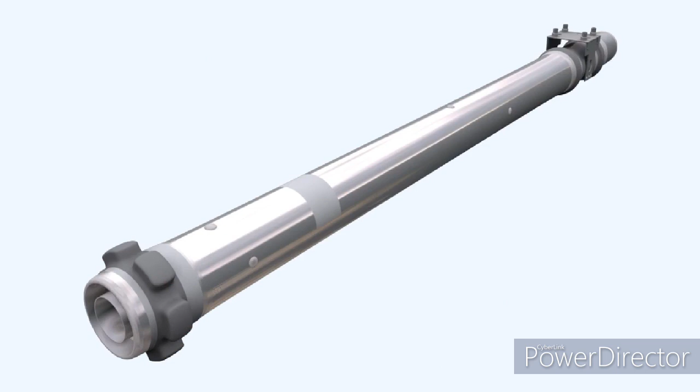In its basic form, a capacitance system, which is much more accurate than the float system, consists of a tank unit, which is effectively a variable capacitor, located in the fuel tank, together with an amplifier and an indicator. A tank unit consists of two concentric aluminium alloy tubes, which are held apart by pairs of insulating pins. The coaxial electrical connections are insulated, and the unit is insulated from the tank.

The principle of operation of the capacitance system is based on the use of fuel and air as the dielectric between parallel plate capacitors, which have a fixed area and a fixed distance between them. The only variable in the system is then the ratio of the dielectrics used, which are fuel and air. That ratio is determined by the quantity of fuel in the tank.

Incorporated in the system are reference units, which reduce indication errors that would occur if the dielectric constant of the fuel changes from its normal value, which is about twice that of air, and directly proportional to its density. Reference units are located on the lower end of a tank unit, and are always totally submerged in the unusable fuel that remains in the tank.

The circuit is compensated for changes in temperature, and will indicate the mass of the fuel in the tanks. Fuel gauging systems can incorporate an additional indicator known as the fuel totalizer, which can indicate the sum of all of the tank quantities.

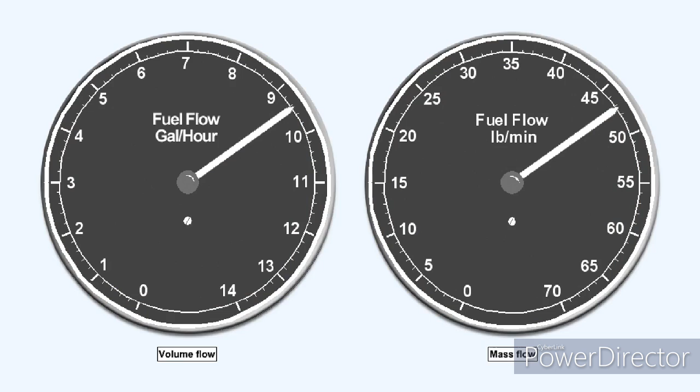As well as the quantity of fuel measured, the instantaneous fuel flow can be shown. To obtain the indication of total fuel used, the instantaneous fuel flow must be integrated. The fuel flow meter can display either volume flow or mass flow. To indicate mass flow, the meter must be compensated for the density of the fuel.

A fuel pressure gauge can be adapted to be used as a simple flow meter. This system is used on many light piston engine injection systems. Most gas turbine engines use an electrical sensor, which utilizes the change in either the torque output or the rotational speed of an impeller situated in the high-pressure fuel line to the fuel spray nozzles.

This type of fuel flow meter consists of a cylindrical light alloy casting, within which are guide vanes that support the shaft of a helical vane impeller. The impeller has a magnet embedded in it. Electrical pick-off coils are situated in the wall of the cylinder casting. When the fuel flow rotates the impeller, a sinusoidal signal is induced in the pick-off coils.

The frequency of the sinusoidal signal is proportional to the speed of the rotor, which in turn is proportional to the rate of flow. The total consumption is obtained by integrating the rate of fuel consumption over time. A flow meter that displays fuel consumed as well as fuel flow is called an integrated flow meter.

Modern aircraft employ remote indicating systems that can be powered by either direct current or alternating current supplies. Whatever the power source, each data transmission system employs a remotely positioned transmitter located at the source of the information, and a receiver which responds to the information received.

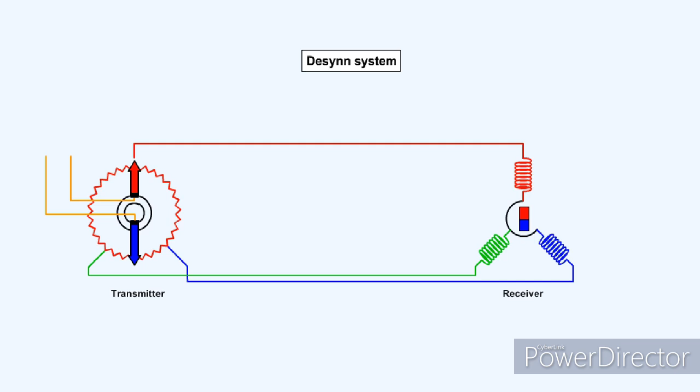The transmitter consists of a continuous resistance ring or potentiometer, which has 3 fixed tappings, A, B and C, spaced 120 degrees apart, which are connected to the receiver. The input shaft carries 2 diametrically opposed spring-loaded sliding contacts, or wipers, which are in contact with the potentiometer. The wipers are fed via slip rings and brushes with direct current.

The receiver consists of 3 high-resistance coils, whose axes are spaced 120 degrees apart, with a permanent magnet rotor pivoted at their center carrying a pointer shaft. The 3 coils are connected to the tapping points A, B and C in the transmitter.

When direct current is applied to the transmitter wipers, the voltages at the tapping points A, B and C produce a current flow in the 3 stators of the receiver, and a resultant magnetic field is produced. The rotor magnet aligns itself with this magnetic field.

The magnitude and polarity of each tapping point voltage varies according to the position of the wipers, and thus, if the input shaft is rotated, the change of voltages at A, B and C produces a variation in the current flowing in the stator coils, and rotation of the resultant magnetic field in sympathy with the rotation of the input shaft. The rotor magnet remains aligned with this field at all times, and so rotates in synchronism with the input shaft.

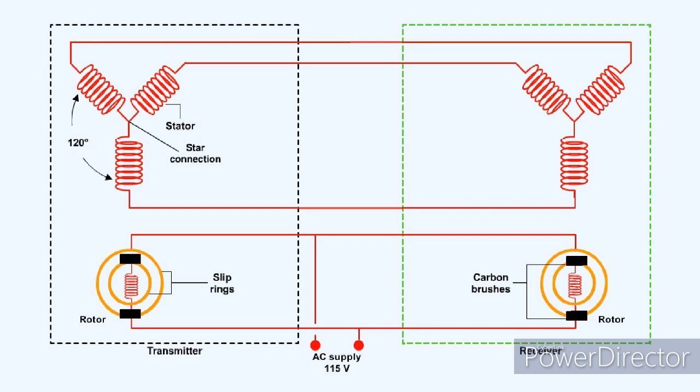The receiver is identical to the transmitter, and they are connected electrically to each other as shown here. The 2 rotors are supplied by alternating current from the same source. With power applied, both of the rotors will adopt the same position relative to their stators. The rotor of the transmitter can be attached to the output shaft of any device which needs positional information communicating to a remote position.

The magnetic flux generated in the coil of the rotor interacts with the coils of the stator and causes a current to flow in their windings.

Because the stator coils of the transmitter and receiver are in series with each other, the stator coils of the receiver now have a magnetic field around them which is identical to that around the stator coils in the transmitter. The rotor in the receiver aligns itself with the magnetic field formed in the receiver stator, adopting a position identical to that of the transmitter stator.

The synchro system is more accurate than the Desynn system.

Some aircraft indicate and record usage of their engines in flight. The flight hour meter can be coupled to an airborne sensor which energizes it at certain airspeeds. The information obtained from the flight hour meter can be used to determine the time to run between engine servicing periods.

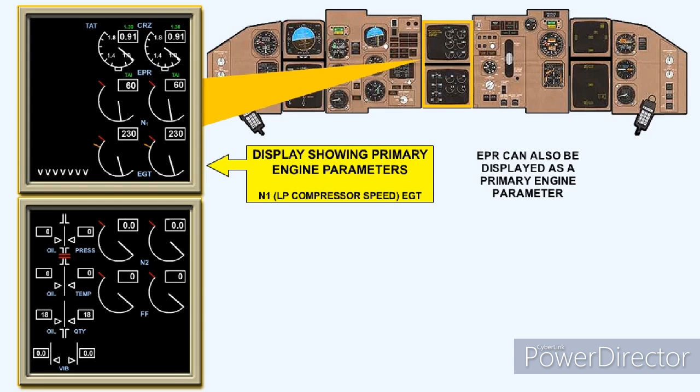The display units provide a wide variety of information relevant to engine operation and operation of other automated systems, and they utilize color cathode ray tubes. The units are mounted one above the other. The upper unit displays the primary engine parameters, N1 speed, exhaust gas temperature, and warning and caution messages. In some cases, this unit can also display the engine pressure ratio, depending on the type of engines installed and on the methods used to process data by the thrust management control system.

The lower unit displays secondary engine parameters, that is N2 speed, fuel flow, oil quantity, pressure and temperature, and engine vibration. In addition, the status of non-engine systems, for example flight control surface positions, hydraulic systems, the auxiliary power unit, etc., can also be displayed, together with aircraft configuration and maintenance data. The row of V's shown on the upper display unit only appears when secondary information is being displayed on the lower unit.

Seven colors are produced by the cathode ray tubes, and they are used as follows. White: all scales, normal operating range of pointers, digital readouts. Red: warning messages, maximum operating limit marks on scales, and digital readouts. Green: thrust mode readout and selected EPR and N1 speed marks or target cursors. Blue: system testing only.

Yellow: caution and advisory messages, caution limit marks on scales, digital readouts. Magenta: during in-flight engine starting and for cross-bleed messages. Cyan: names of all parameters being measured, for example N1, oil pressure, TAT, etc., and status marks or cues.

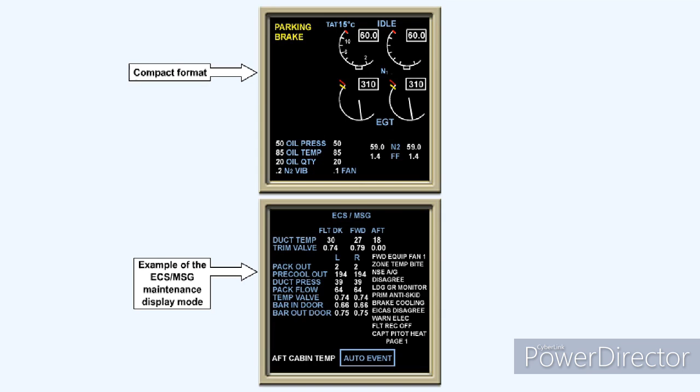The Display Select panel permits control of EICAS functions and displays, and can be used both in flight and on the ground. It's located on the center pedestal on the aircraft flight deck. Moving your mouse cursor over each control will display the purpose of each of them.

The system continuously monitors a large number of inputs, typically over 400 from engine and airframe system sensors, and will detect any malfunctioning of systems. If any malfunction should occur, then appropriate messages are generated and displayed on the upper display unit in a sequence corresponding to the level of urgency of action to be taken.

Up to 11 messages can be displayed on the top line at the left of the display screen and at the following levels. Level A: Warning requiring immediate corrective action. Level A warnings are displayed in red. Master warning lights are also illuminated, and aural warnings, for example the fire bell, from a central warning system are given.

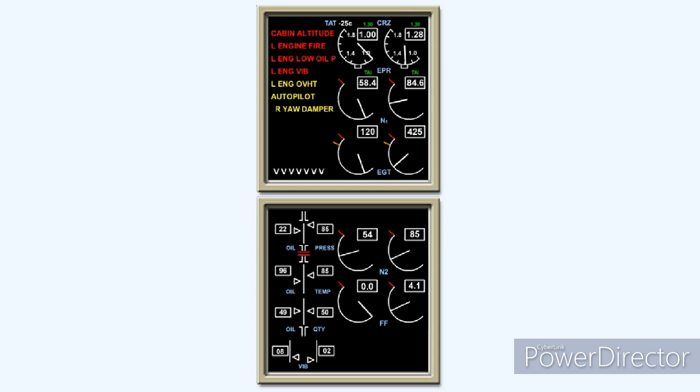A message is automatically removed from the display when the associated condition no longer exists. In this case, messages which appear below the deleted one each move up a line.

If there are more messages than can be displayed at one time, the whole list forms what is termed a page, and the lowest message is removed, and a page number appears in white on the lower right side of the list.

If there is an additional page of messages, it can be displayed by pushing the Cancel switch on the EICAS Caution and Annunciator panel. We'll show the EICAS Caution and Annunciator panel shortly. Warning messages are carried over from the previous page.

The captain and first officer each have a dual-purpose warning caution light on their side of the glare shield. Part of the EICAS Caution and Annunciator panel is used to position cancel switches and a recall switch. Pushing the cancel switch removes only the caution and advisory messages from the display. The warning messages cannot be cancelled. Moving your mouse cursor over each control or indicator will display their purpose.

If the lower display unit should fail when secondary information is being displayed on it, an amber alert message appears at the top left of the upper display unit, and the information is transferred to it as shown here. The format of this display is referred to as compact, and it may be removed by pressing the Engine switch on the Display Select panel.

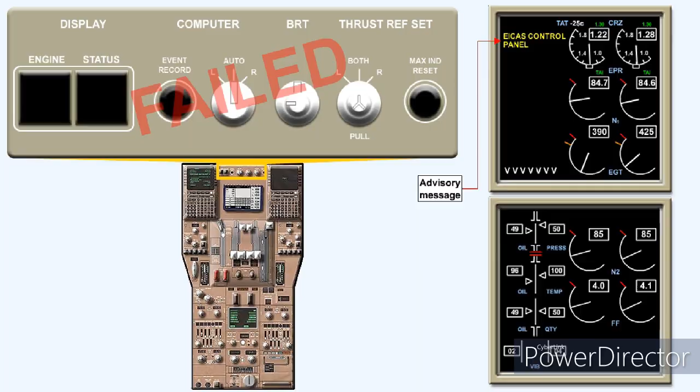The standby engine indicator provides primary engine information in the event that a total loss of EICAS display occurs. The information shown on the standby engine indicator relates to N1 and N2 speeds, EPR and EGT, and the displays are of the LCD type. Operating limit values are also displayed.

Moving your mouse cursor over each part of the indicator will display the purpose of it.

The Maintenance Control Panel is for use by maintenance engineers for the purpose of displaying maintenance data which is stored in system computer memory during flight or ground operations. Moving your mouse cursor over each control or indicator will display its purpose.

The units that comprise the ECAM system, as it was originally developed for the Airbus A310, are shown in this functional diagram.

As far as the processing and display of information are concerned, the ECAM system differs significantly from EICAS, in that the displayed data relates essentially to the primary systems of the aircraft, and is shown in checklist and pictorial or synoptic format.

Engine operating data is displayed by conventional types of instruments. Other differences between the EICAS and the ECAM systems relate to display locations and methods of selection of system operating modes.

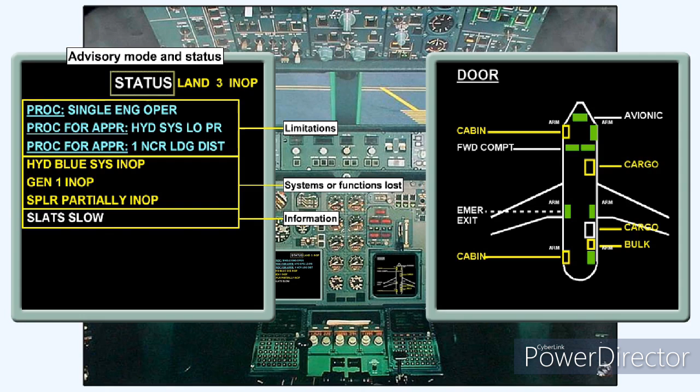The failure-related mode takes precedence over the other 2 automatic modes and the manual mode. In this example of a failure-related mode display, while taxiing out for takeoff, the temperature of the brake unit on the rear right wheel of the left main landing gear bogie has become excessive.

A diagram of the wheel brake system is immediately displayed on the right display unit, and simultaneously the left unit displays the corrective action to be taken by the flight crew.

As the corrective action is carried out, the instructions on the left-hand display are replaced by a message in white confirming the result of the action. The diagram on the right-hand display unit is appropriately redrawn as its system parameters change.

In this example, the failure-related mode warning relates to a single system, and by convention, such warnings are signified by underlining the system title displayed. In cases where a failure can affect other subsystems, the title of the subsystem is shown boxed, as is shown in this example.

Warnings and the associated lights are cleared by means of clear push-button switches on the ECAM control panel.

The aircraft system display mode permits the selection of diagrams related to any one of 11 of the aircraft systems for routine checking, and also the selection of status messages, provided no warnings have been triggered for display. The selections that determine which systems are displayed are made by means of illuminated push-button switches on the system control panel.

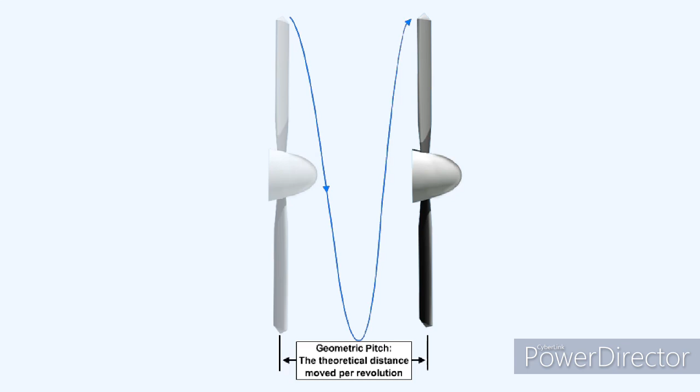The path of the propeller blade through the air, which describes a helix, determines the direction from which it will receive its relative airflow. This helical path is the resultant of the propeller blade rotational velocity and the aircraft forward velocity.

The angle between the relative airflow, the actual path the blade describes through the air, and the chord line of the blade is called the angle of attack. The angle of attack is kept quite small, usually between 2 to 4 degrees.

As the blade rotates at this small, positive angle of attack, a thrust force is generated, very similar to the way in which lift is generated on a wing.

Because the rotational velocity of any point on a propeller blade increases with increasing distance from the center of the hub, so the magnitude of the thrust generated at any point along the blade would also increase with this distance, if the pitch of the blade remained constant along its entire length.

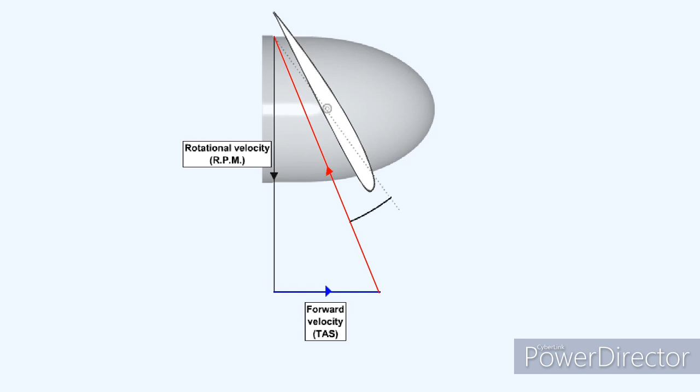We've just seen that a propeller receives its relative airflow from a direction which is governed by the aircraft's true airspeed in the direction of flight, and its own rotational velocity in the plane of rotation. The operating angle of attack will be the angle between the relative airflow and the chord line of the propeller blade.

This chord line is set at an angle to the plane of rotation, which, as we've already seen, forms the blade angle or the propeller pitch.

From this animation, it can be seen that an increase in true airspeed will reduce the angle of attack, whereas an increase in rotational velocity, or RPM, will increase it.

At high true airspeed and low propeller RPM, for instance with the aircraft in a power-off dive, it's possible to reduce the angle of attack to zero. While at low true airspeed and high RPM, for instance in the climb, it's possible to stall the propeller blade.

The propeller designer will attempt to ensure that peak efficiency is achieved at cruise true airspeed and cruise RPM.

When a fixed-pitch propeller is being driven by a piston engine, the RPM is dependent on both the power setting, throttle position, selected by the pilot, and the true airspeed of the aircraft.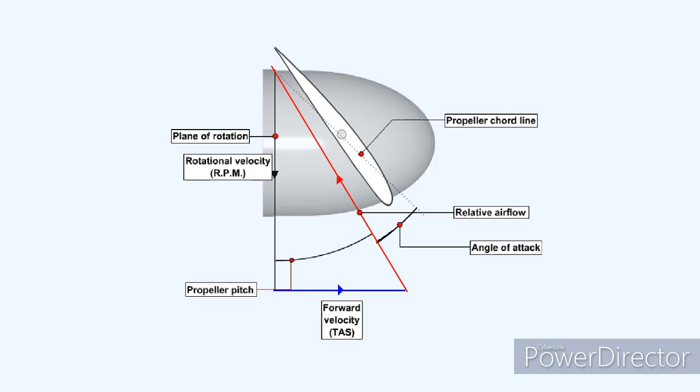The power setting of a piston engine is defined by a combination of manifold pressure and engine RPM. Where both a separate power lever and a propeller RPM control are provided, it's possible to vary one of these parameters while leaving the other to remain constant, so optimizing the operation of the engine-propeller combination to give the best efficiency and fuel economy, while reducing the engine wear and tear to a minimum.

In order to achieve this, a variable pitch propeller is used. The system changes the pitch angle of the propeller blade to vary the load on the engine, thereby maintaining the selected RPM of the engine-propeller combination independent of manifold pressure, provided that the propeller is operating between its fine and coarse pitch stops.

The fine and coarse pitch stops may be fitted internally or externally, depending on the make of the propeller.

Once an RPM has been selected, a control unit, either a constant speed unit or propeller control unit, will automatically vary the propeller blade pitch angle, and therefore its angle of attack to the prevailing relative airflow, in order to maintain the selected RPM despite variations in airspeed and manifold pressure.

Variable pitch propellers may also have a reverse pitch and/or feathering function, the advantages of which will be discussed later in this lesson.

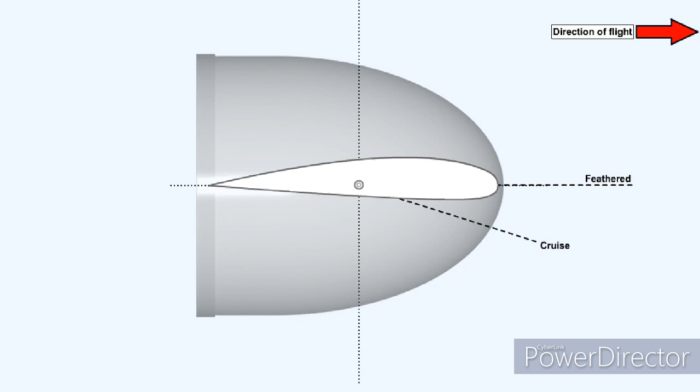The feather position is not included in either range, and is used for emergency conditions only. In the event of engine failure, the propeller blades will be moved directly to this position to prevent windmilling. There are no pitch angles available between max coarse and feather.

The method of control within the alpha and beta ranges, and the means of achieving the propeller feather position, will be discussed progressively throughout this lesson.

Varying the pitch of a propeller throws up two basic problems, one of blade actuation and one of pitch control. We will initially examine the problem of blade actuation. The issue of pitch control will be covered later in this lesson.

Although mechanically or electrically actuated pitch change mechanisms are in use, the hydraulic method is the most commonly used. The system utilizes oil from the engine or reduction gearbox lubrication system as the source of hydraulic pressure.

In this system, the pitch change mechanism is operated by a piston moving under the influence of the oil pressure.

Hydraulic pitch change mechanisms can be one of two types, single-acting or double-acting.

A single-acting propeller has oil pressure applied to only one side of the piston. The return movement of the piston requires the force of a spring, or sometimes compressed gas.

A double-acting propeller has oil pressure applied to either side of the piston, in order to move the propeller between the two extremes of fine and coarse pitch.

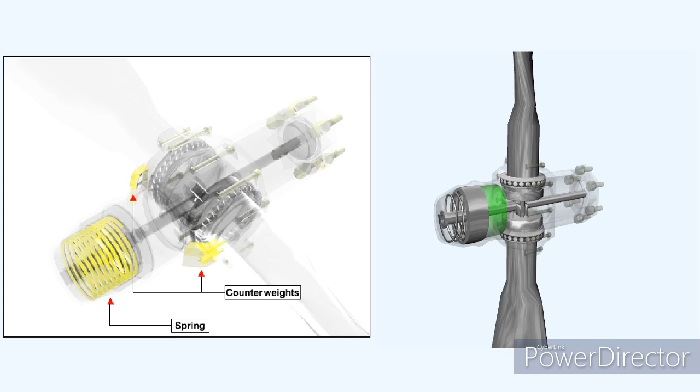The constant speed unit, or CSU, incorporates a valve, which, because it has lands or grooves cut into the operating portion of its stem, is called a landed valve. This landed valve controls the flow of oil to and from the propeller actuating, or pitch change cylinder.

A speeder spring, acting above the valve, tends to force the valve downwards, while a set of flyweights, driven by the engine, oppose the spring and act to lift the valve. An input from the pilot's RPM lever, or propeller condition lever, will adjust the setting of the speeder spring, selecting the RPM, which the CSU then automatically maintains.

In order that it can respond to the various demands made by the pilot regarding the propeller RPM, the constant speed unit controls the oil flow to the pitch change cylinder in three ways.

If the propeller is underspeeding, then the flyweights will be leaning inwards because of the reduced centrifugal force, allowing the speeder spring to push the landed valve downwards. This will allow the unit to supply oil to fine off the pitch of the propeller, causing an RPM increase.

If the RPM is as required, in other words the propeller is on speed, then a hydraulic lock is formed in the system, maintaining the blade pitch constant.

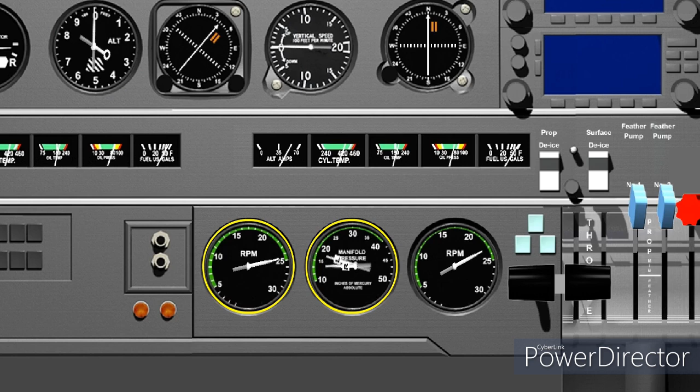As we've seen already, a tendency for RPM to increase, an overspeed condition, will be countered by a supply of oil being fed to the coarse pitch side of the piston in the pitch change mechanism. As shown in this animation, the pitch will then coarsen and propeller torque will rise as a result of the increase in the blade angle of attack. Propeller torque now exceeds the engine torque and will cause the RPM to decrease back to the selected setting.

As the RPM regains its previously selected value, the movement of the landed valve in the constant speed unit, which directed the oil flow in the first place, is progressively reversed until it regains the sensitive position, where a hydraulic lock holds the piston in the pitch change mechanism immovable until the next RPM selection or disturbance in airspeed, altitude, or engine power setting.

A tendency for the RPM to reduce, termed a propeller underspeed condition, must be countered by a supply of oil being fed to the fine pitch side of the piston in the pitch change mechanism. As shown in this animation, the pitch will then fine off and propeller torque will fall as a result of the decrease in the blade angle of attack. Propeller torque is now less than the engine torque and will cause RPM to increase back to the selected setting.

As RPM regains its previously selected value, the movement of the landed valve in the constant speed unit, which directed the oil flow in the first place, is progressively reversed until it regains the sensitive position, where a hydraulic lock holds the piston immovable until the next RPM selection or disturbance in airspeed, altitude, or engine power setting.

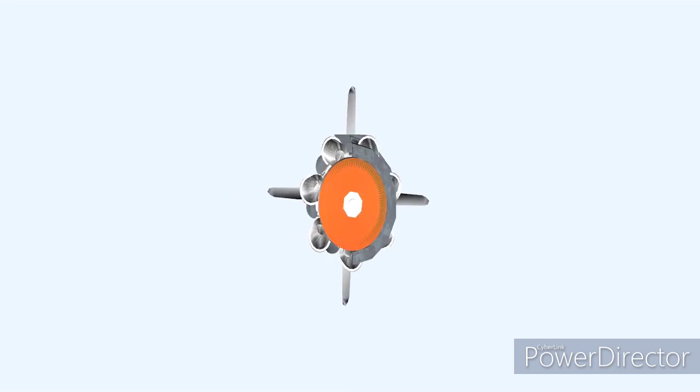Some turboprop engines utilize a single lever arrangement, whereby the pilot is provided with a power lever only. In this arrangement, propeller pitch, RPM, and engine fuel flow (power) are simultaneously adjusted. Feathering may be achieved by moving the engine high-pressure fuel cock to the feather position.

New generation reciprocating engines equipped with Full Authority Digital Engine Control, or FADEC, also use a single lever arrangement, whereby the pilot selects the required power setting and the propeller pitch angle is controlled either electronically by an electronic engine control unit or by a hydromechanical control unit.

The feathering mechanism provides a means of manually lifting the landed valve to the overspeed or coarse pitch condition when the appropriate control is moved to the feather position. The actions required to feather a propeller are dependent on the type of engine and propeller combination and the type of aircraft they are installed in.

For single-acting propellers, this normally involves moving the propeller condition lever, or RPM lever, to the feather position. Moving the appropriate lever to the feather position mechanically lifts the landed valve against the speeder spring to its highest position, thereby simulating an exaggerated overspeed condition.

The landed valve will remain in this position until the feathering control is moved back to its normal position. Any oil in the pitch change cylinder can now drain away, allowing the spring or gas pressure, assisted by counterweights, to move the piston onto the feathering stop.

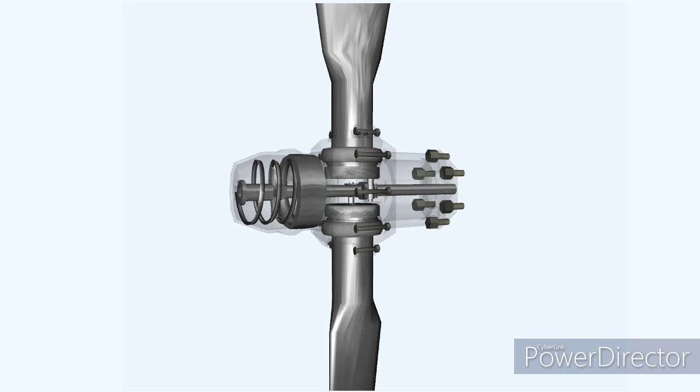While this condition would be acceptable to a turboprop with a free power turbine, it would result in an unacceptably high loading on the starter motor of a piston engine or direct coupled turboprop. So, to prevent the feathering spring pushing the blades all the way to the feathered position, on those engines where a feathered propeller would cause stress on startup, centrifugal latch pins are incorporated in the pitch change mechanism. The latch pins are held disengaged by centrifugal force while the engine is running.

As the engine RPM reduces, small springs behind the latch pins overcome centrifugal force, and they are allowed into contact with the piston mechanism. Typically, the value of the RPM at which the latch pins become engaged is around 650 to 700.

After engine shutdown, the latch pins engage with a groove in the piston mechanism, which locks the piston. This prevents it from being pushed beyond a predetermined blade angle, and further into the feathered position by the feathering spring. When the engine is started and RPM increases, centrifugal force will disengage the latch pins.

Fine pitch oil will quickly build up and hold the propeller against the fine pitch stop.

Note that if a propeller engine combination does have a centrifugal latch mechanism fitted, it may become impossible to feather the propeller of that engine once its RPM has fallen below the latch setting value. This is because once they are engaged, the latch pins can prevent the piston being moved any further by the feathering spring. It is thus extremely important to complete the feathering drill before the RPM decays below this figure.

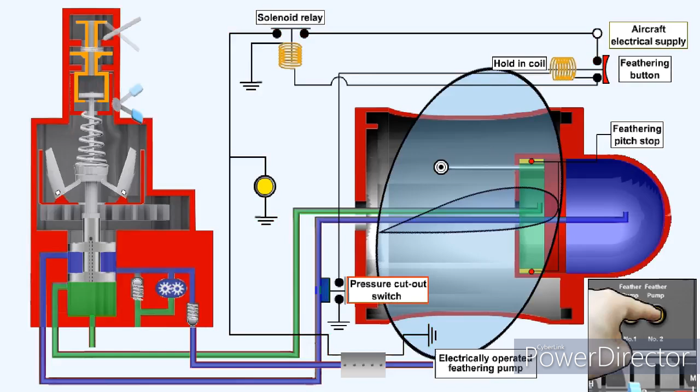Oil pressure will now build up within the system, eventually operating a pressure-operated cutout switch, which will interrupt the supply to the feathering button hold-in coil. This causes the feathering button to release, which terminates the supply to the feathering pump solenoid relay, which in turn breaks the supply to the feathering pump.

If the propeller is allowed to windmill, the forces generated will cause it to try to unfeather itself. Moving the propeller blades a few degrees below the feathered position will cause the propeller to rotate, and centrifugal turning moments will tend to move the blades towards a finer pitch. This will cause the propeller to rotate faster, until it comes under the control of the propeller control unit.

The propeller control lever of the unit being unfeathered should be placed in line with that of the operating engine or engines, and, where fitted, the feathering lever should be reset. This allows the speeder spring to push the landed valve down. It also helps to minimize the yaw which will inevitably accompany the effect of unfeathering.

Pressure oil can now be directed to one side of the pitch change mechanism to move the piston towards a finer pitch, and coarse pitch oil will be allowed to drain from the other side as it does so.

The feathering button should now be pressed. This starts the feathering pump running, which will supply the pressure oil to the pitch change mechanism to move the blades away from the feathered position towards fine.

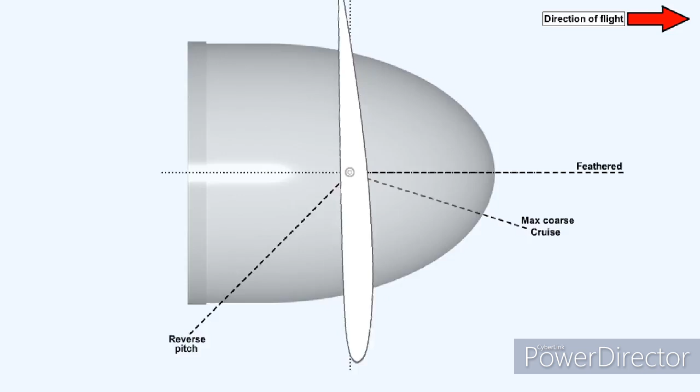Most turboprop engines are provided with a system of propeller control which is defined by alpha and beta ranges. The alpha range is used at high speed, during the takeoff run, in flight, and during the initial high-speed part of the landing rollout. The alpha range is selected by moving the engine power lever to a position at or above flight idle.

The beta range is used on the ground only. It's selected during the landing roll by first removing the flight fine pitch stop, or FFPS, which was previously engaged to prevent the blades moving to ground fine pitch in flight, and then moving the engine power lever to a position below the flight idle position. On systems not equipped with a hydraulic flight fine pitch stop, the power lever is moved through a flight idle detent or gate.

With the propeller blades functioning within the alpha range, their pitch is controlled automatically by the propeller control unit, whilst within the beta range their pitch is controlled by the operator's movement of the engine power lever. In most aircraft, the selection of the beta range is made by movement of the flight fine pitch stop, the FFPS lever. Alternatively, in some systems the selection can be made via the condition lever, that is the RPM lever, itself.

A warning light, usually blue or amber, illuminates whenever the flight fine pitch stop is disengaged. Additionally, other warning lights may be provided, which illuminate whenever the propeller blades are moved below the flight fine pitch position, that is, into the beta range.

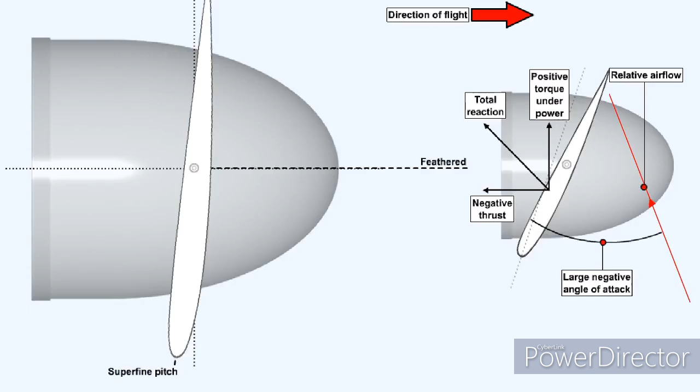On landing, the flight fine pitch stop lever must be moved to the disengaged or ground position before the engine power lever can be moved below flight idle. On systems not equipped with the removable flight fine pitch stop, the power lever must be moved through a fixed gate or detent. On some aircraft, microswitches, which sense that the weight of the aircraft is on the wheels, ensure that this selection cannot be made in the air.

Once the power levers are moved below flight idle, the propeller blades move into the ground fine pitch range, and the propeller control unit relinquishes control. Propeller RPM is now controlled by power lever movement.

The forward velocity of the initial landing roll, combined with low RPM and low blade angle, produces a zero or negative angle of attack. This reverses the total reaction produced by the propeller, which acts to slow the aircraft in its landing roll. This condition is known as disc braking.

Propellers which can have their pitch angle made even more negative are known as fully reversing propellers. As the power lever is moved further rearwards into the reverse pitch range, the blades move into the negative pitch position. The reversed total reaction produced now increases. This exerts increased load on the engine, so engine power is increased in order to maintain a constant RPM. The engine power and reverse airflow through the propeller is now being used to slow the aircraft down. This condition is known as power-on braking.

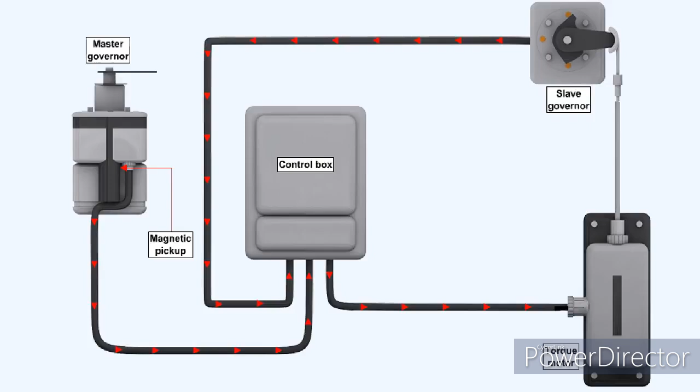Electromagnets in the head of the rotating assemblies of the propeller control units of each engine are used to generate an RPM signal. An aircraft fitted with such a synchronization system will have a designated master engine, and other engines will be specified as slave engines. The signals from the propeller control unit of the master engine and those from the slave engines are sent to a control unit where they are compared.

With the synchronizing system engaged, any RPM differences between the master and slave engines will be sensed in the control unit. The control unit generates proportional, positive or negative current outputs which are sent to torque motors.

The torque motors are mounted on the slave engine propeller control units in such a way that a signal indicating the slave engine is running at a lower RPM than the master will cause the slave engine's torque motor to turn, in order to fine off its propeller, thus increasing its RPM until no discrepancy exists between the slave and master engine speeds.

If, on the other hand, the control unit receives a signal indicating that a slave engine is running faster than the master engine, it will send a signal to the appropriate torque motor to coarsen off the propeller blades of that slave engine to reduce its RPM, until once again no discrepancy exists between the slave and master engine speeds.

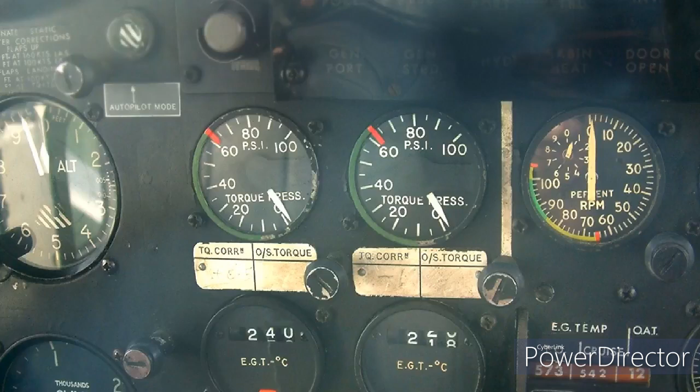Either electronic or hydraulic torque meter systems can be found in service. An electronic torque meter system, such as the one shown here, utilizes the angular displacement of a driveshaft placed between the engine and the propeller drive. This displacement, being proportional to the transmitted power, is measured electronically, and the signal thus generated is used to drive the needle in the torque meter. This system is inherently lighter and more reliable than the hydraulic system.

When the engine is running, the pinions or planet gears are being driven around inside the stationary gear by the central engine crankshaft. The thrust reaction generated by the rotation of the pinions will try to rotate the stationary gear in the opposite direction to that of the pinions.

The stationary gear is restrained by being attached to pistons fitted within cylinders that are being supplied by oil pressure, which is generated by a torque meter system pump. One of the pistons in the system partially covers a bleed hole, which, if uncovered, will allow oil pressure to be dumped to the engine oil return.

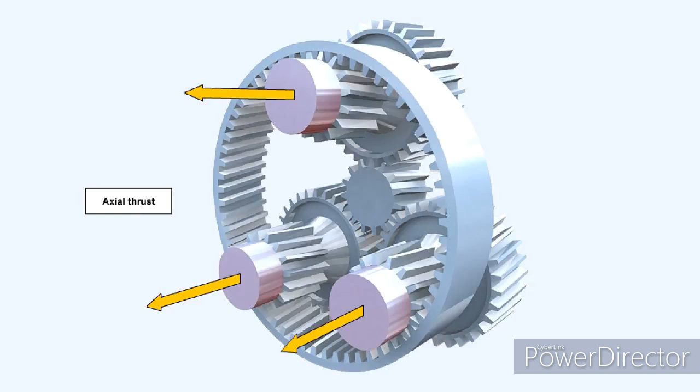The helical gear torque meter system depends upon the axial thrust which is developed when helically cut gears are used to transmit power through the propeller reduction gear. The shafts of the gears rotate within cylinders, and the axial thrust they develop is balanced by oil pressure trapped inside the cylinders.

Torque meter oil pressure is transmitted to a gauge in the cockpit. The gauge is calibrated in pounds per square inch.

The system oil pressure, which in some systems can have quite a high value - for instance the Proteus engine was capable of developing about 800 pounds per square inch of torque meter pressure - is generated by a torque meter system oil pump.

In this system, which is similar to that used on the Rolls-Royce Dart engine, there is an oil pressure bleed hole within each cylinder. When the thrust developed by the helically cut gear is exactly balanced by torque meter oil pressure, the shaft of each helical gear takes up a sensitive position, partially covering the bleed hole.

If engine power output increases, the axial thrust being transmitted by each gear also increases, which forces its shaft further into its retaining cylinder. Thus the shaft is forced into a new position where it blocks the bleed hole.

The torque meter oil pressure, being unable to escape, now builds up to a new higher value, until it's able to force the gear shaft back into the sensitive position, where once again it's able to balance the axial thrust being developed by the helical gear.